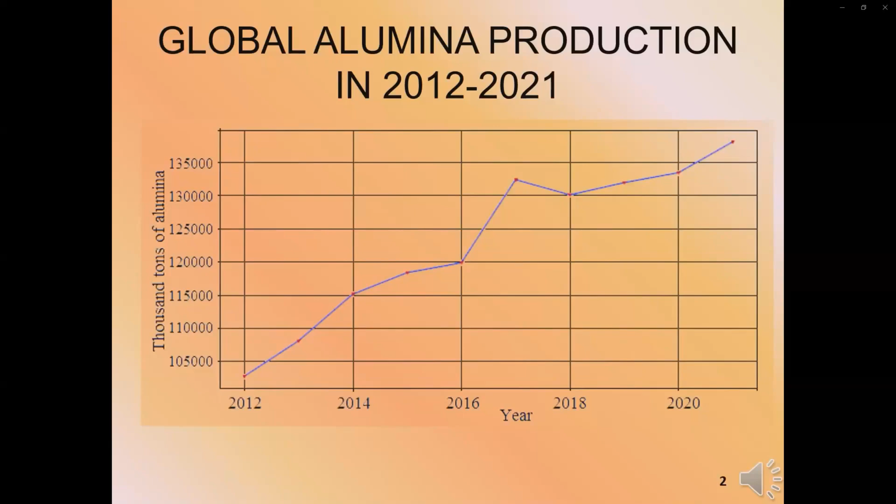Due to the lack of efficient sludge processing technology, red mud is stored in sludge storage facilities. They occupy a large area, pollute the environment, and pose a threat of environmental disaster in the event of a breakthrough in the wall of the slurry storage facility.

An example of such a case is the environmental disaster in Hungary in 2010. At a large alumina production plant, a dam containing a reservoir of toxic waste collapsed. Approximately 1.1 million cubic meters of toxic substance, red mud, leaked. The disaster affected an area of 40 square kilometers in 3 regions. 10 people became victims of the accident.

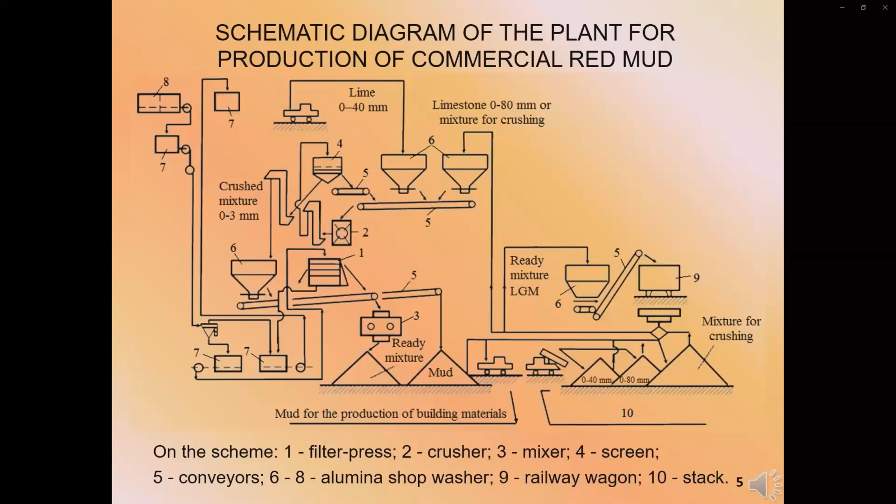Scheme for co-processing red mud and oily mill scale. An example of a hydrometallurgical process for processing red mud is the technology of joint leaching of red mud and oily mill scale, the scheme of which is presented on slide 8.

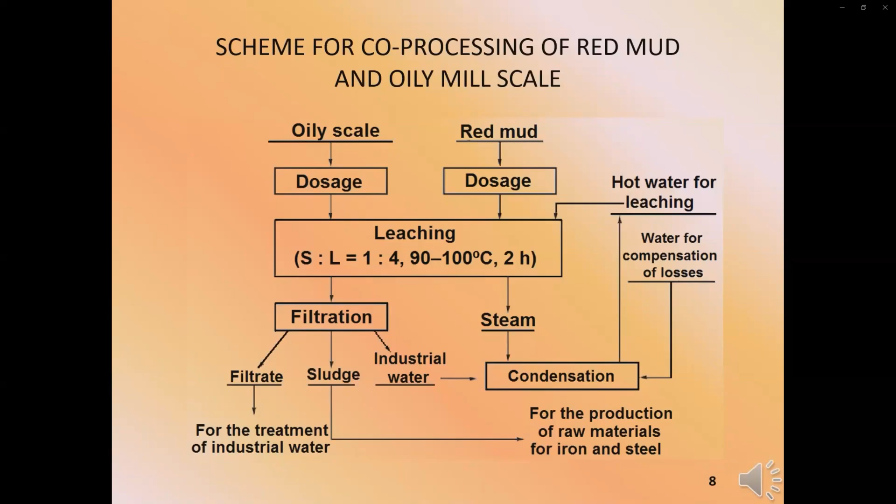Key findings: Due to the lack of effective technology for processing red mud, 95% of this product is stored in sludge storage facilities, which occupy large areas and harm the environment.

At the same time, sludge is a valuable technogenic metallurgical raw material. The processing of sludge pulp is complicated by high content of moisture and alkali.

Technology using filter presses is effective for sludge dewatering, and lime is used to separate alkali. It is advisable to combine thermal sludge cleaning with chemical processes for extracting valuable components.

The most promising for industrial implementation is complex waste-free processing of red mud, which involves, at the first stage, the pyrometallurgical extraction of thermodynamically extractable metals, and at the second stage, the hydrometallurgical extraction of the remaining metals from the slag, with the subsequent direction of the remaining solid materials to the construction industry.

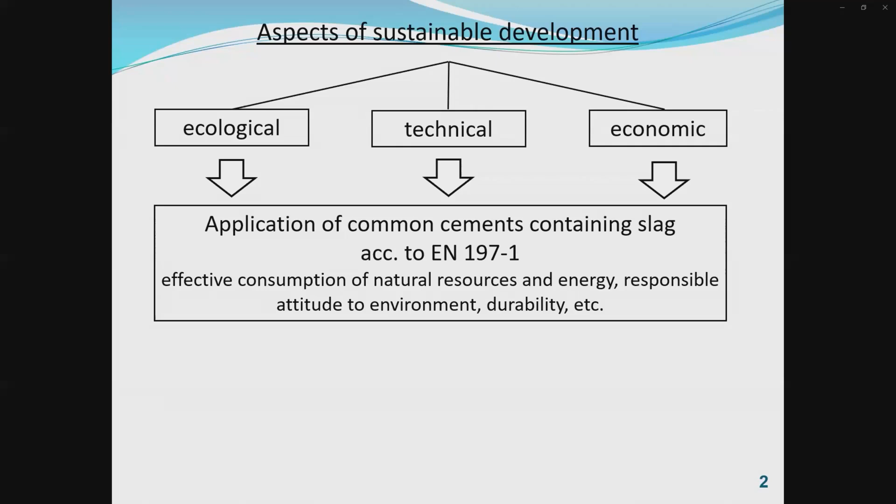The actuality of common cements containing slag implementation is due to their conformity with ecological, economic, and technical aspects of sustainable development concerning efficient consumption of raw materials and energy resources, responsible attitude to the ecology of the environment, durability, etc. The main problem of using common cements containing slag is slowed hydration processes and, as a result, loss of early compressive strength. The best solution for activating such cements is alkaline activation.

Sodium silicates, the anions of which are similar to hydrated initial products of destruction of the alumina-silica-oxygen framework and serve as their additional reserve, are found to be the most effective alkaline activators. The best solution is the use of sodium metasilicate pentahydrate due to its constant composition, market availability in a solid state, and easiness in use in the process of cement and concrete manufacture.

Increased slag content in cement systems and alkaline activation provide formation of more preferable hydration products, cause high strength gain and durability. The main obstacle in using the alkali-activated common cements containing slag made with sodium metasilicate is a quick setting.

The use of setting retarder, effective in alkali-activated cements, for example sodium lignosulfonate, can be a way to control their structure formation processes. So, the aim of the study was to discover an approach to control the structure formation in alkali-activated common cements containing slag through alkali activation with the help of sodium metasilicate.

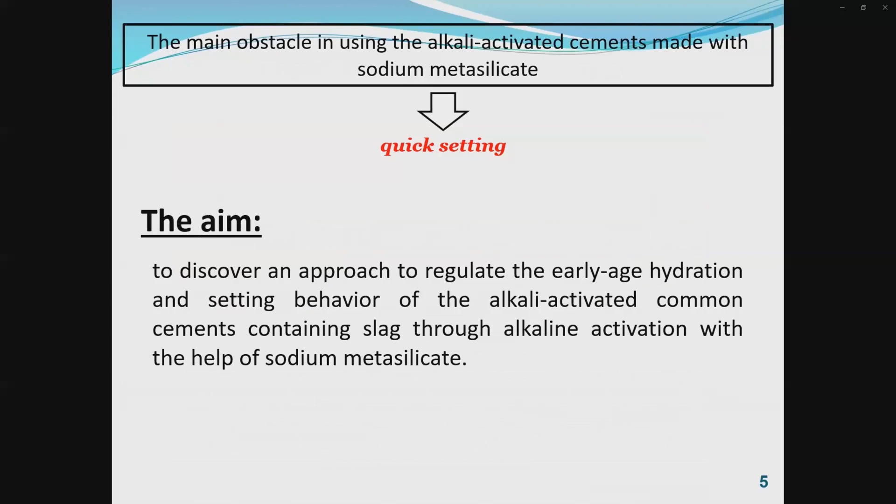Raw materials: granulated blast furnace slag, as well as Portland cement, CEM I 42.5R, were used as basic constituents of the common cements containing slag. To evaluate the basicity of the cement systems under study, a modulus of basicity as a ratio of masses of oxides was applied.

Decrease in basicity of cement system and use of surfactants can be a decision to provide required setting times of such cement.

Used as an alkaline component was sodium metasilicate in a solid aggregate state and a liquid aggregate state. Sodium metasilicate was added in two aggregate states, both in equal quantities, worth 12% calculated on dry matter. Sodium lignosulfonate was used as a setting retarder in the form of concentrated solution.

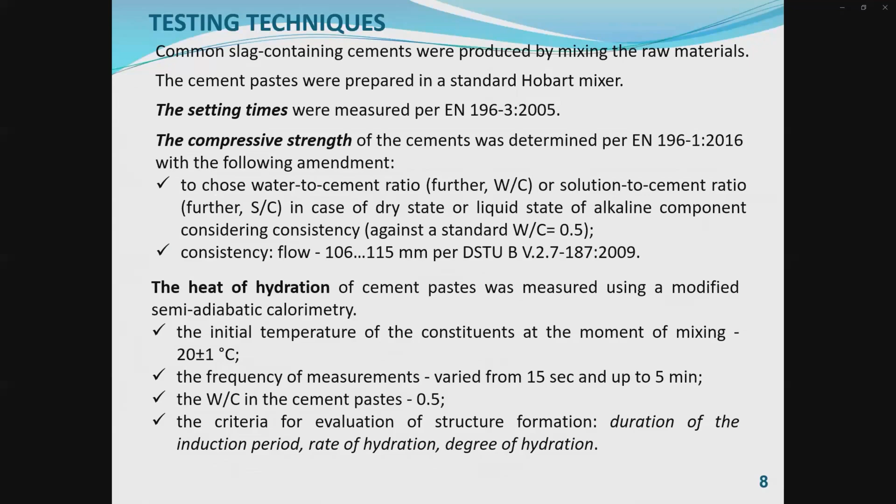The heat of hydration of cement paste was measured using a modified semi-adiabatic calorimetry.

The research work was divided into three parts. Task 1: research the influence of basicity of the cement system. Sodium metasilicate was used in solid form.

It was shown that with decrease in the alkali-activated cement system basicity from modulus basicity 2.5 down to 1.2, the structure formation processes retarded. An increase in the duration of the induction period, as well as a decrease in the degree of hydration, confirm this fact.

The alkali-activated cement system containing 5% slag is characterized by extremely quick setting times and low strength, correlated with data concerning the problem of its application.

An increase in slag content in the cement system from 5 up to 95% is accompanied by an increase in initial setting times from 8 up to 100 minutes, and final setting times from 11 up to 130 minutes. The obtained results correlate well with the data of the thermokinetic analysis.

With increasing slag content from 5 up to 95%, the compressive strength of the alkali-activated cement systems at an age of 2 days increased from 4 up to 34 MPa.

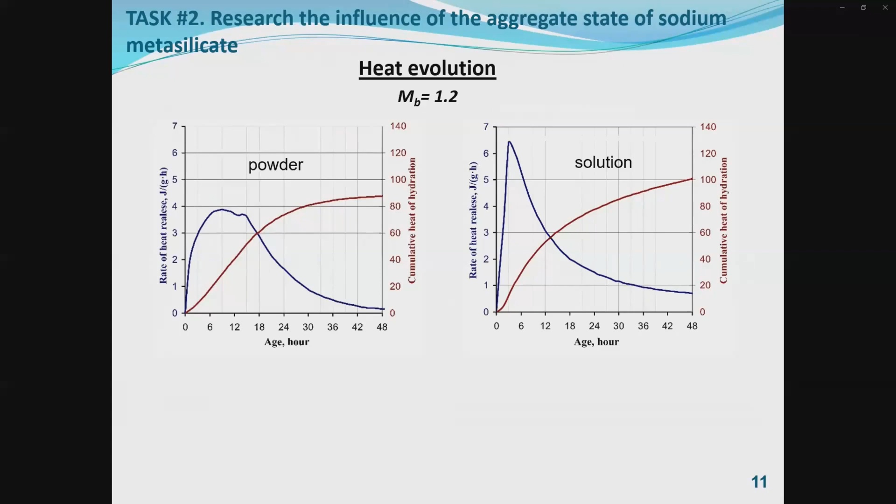Comparison of the setting times of the alkali-activated cement systems made with sodium metasilicate solution versus powder showed quicker initial setting times in the case of solution, within the range of 1-8 minutes. These initial setting times were too short and could not be accepted for the alkali-activated cement system.

The alkali-activated cement system containing 5% slag, in the case of solution, is characterized by still low strength compared with powder. The use of sodium metasilicate solution compared to sodium metasilicate powder resulted in high compressive strength of cement system containing

50-95% of slag at ages of 1, 7 and 28 days: 43-51 MPa, 88-92 MPa, and 108-115 MPa, respectively.

The obtained results testify to a necessity to decelerate the rate of structure formation in the alkali-activated cement systems, for the whole range of contents of slag constituents made with sodium metasilicate solution, to provide acceptable setting times.

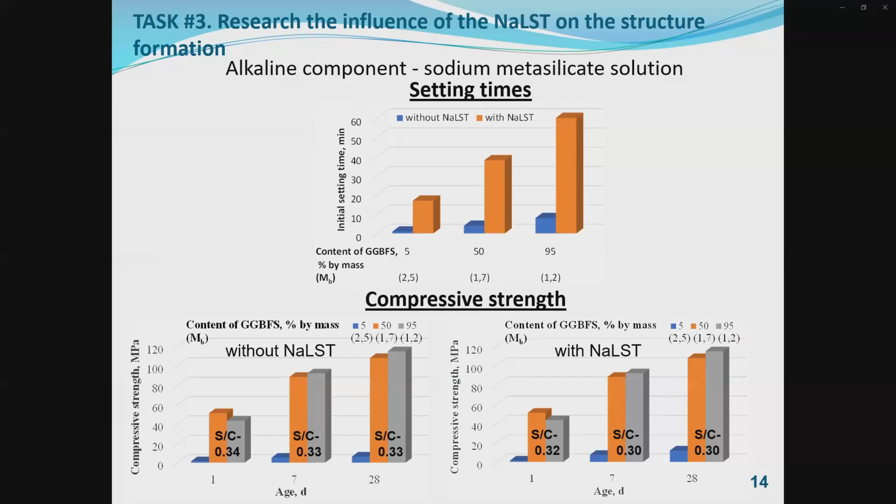Thus, it was revealed that alkaline activation with the help of sodium metasilicate in liquid form, in contrast to dry form, while necessarily decreasing the modulus of basicity from 2.5 down to 1.2-1.7, as well as application of sodium lignosulfonate as a setting retarder, enables control of early structure formation. This resulted in obtaining quick-hardening alkali-activated cement systems containing slag with regulated initial setting times of 38-60 minutes and high strength gain similar to that of high alumina cements.

Thank you for your attention.

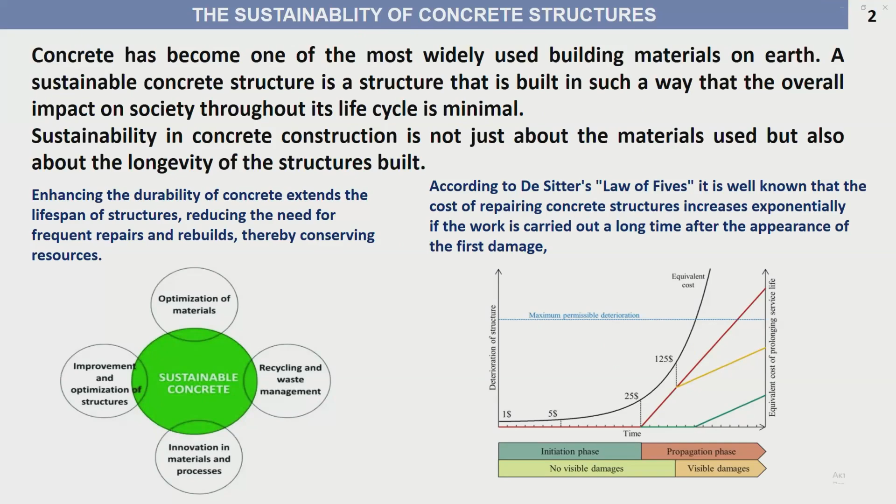Causes of building structure destruction include environmental influences and improper design of concrete and mortar. This leads to deformation and cracking, which reduce the durability of structures.

The interface between cement-based repair materials and the concrete substrate is a problem today. Therefore, the aim of this work is to design a composition of rapid hardening, non-shrinking cementitious mixture to enhance the sustainability of concrete structures, to study the process of their structure formation, and determine their physical and mechanical properties.

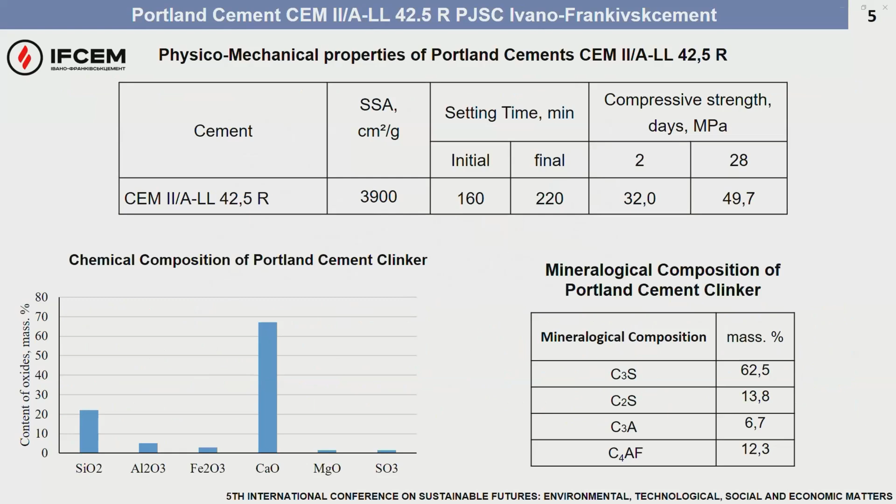As a binder of the repair mixture, Portland limestone cement of compressive strength class 42.5R from Ivano-Frankivsk cement plant was used.

The active mineral aluminum-containing additive, fly ash from Burshtyn TPP, was used for research. The specific surface area of the fly ash is 4,200 square centimeters per gram.

Sodium tetrahydroxyaluminate was used as an alkaline activator and accelerator of setting. The high aluminum oxide content enables the formation of calcium hydrosilicates and calcium hydroaluminates in the cement mixture.

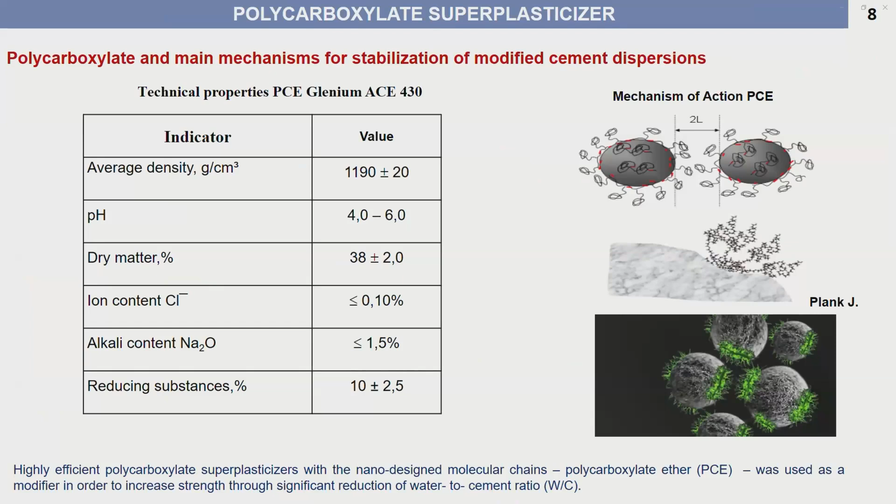Polycarboxylate ether superplasticizers were used to modify the mixture. Highly effective polycarboxylate superplasticizers with nano-designed molecular chains were used as a modifier in order to increase strength through significant reduction of the water-to-cement ratio.

Fine aggregate sands were used to design the cement mixture, with a fineness modulus of 1.25 for fine sand from the Davidov deposit, and fineness modulus of 2.76 for coarse manufactured sand.

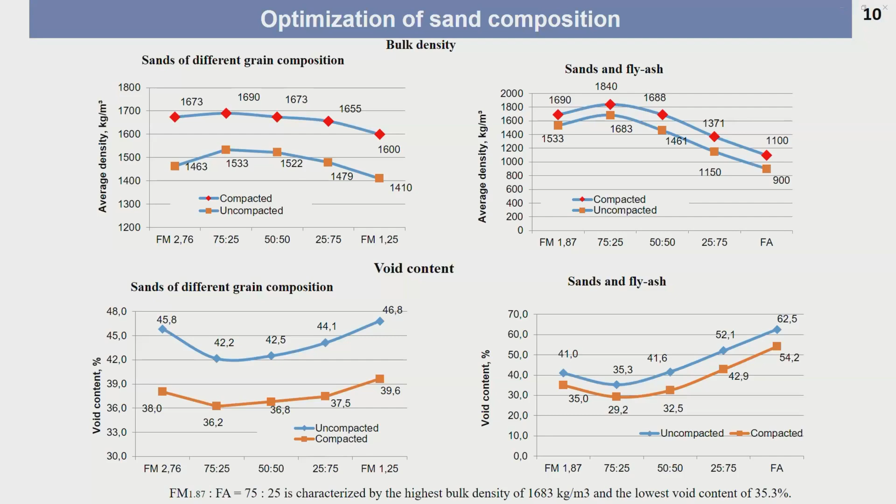To obtain a highly effective rapid hardening repair mixture with the most compact mesostructure, sands of different fractions were optimized. It was found that replacing quartz sand of fineness modulus 1.87 with 25% fly ash increased bulk density to 1,683 kilograms per cubic meter and reduced porosity to 35.3%.

The compositions of the repair mixture were designed using the method of experimental design based on criteria of setting time and strength. Fly ash from 0 to 20% and complex modifier sodium tetrahydroxyaluminate and PCE from 0 to 5 mass percent were used as variable factors.

The introduction of 10% fly ash and 5% alkaline modifier allows acceleration of setting time to 70 minutes initial and 140 minutes final.

The optimal composition with additives of 10% fly ash and 2.5% alkaline modifier ensures rapid hardening with compressive strength of 9.8 MPa and flexural strength of 3.4 MPa after 14 hours of hardening.

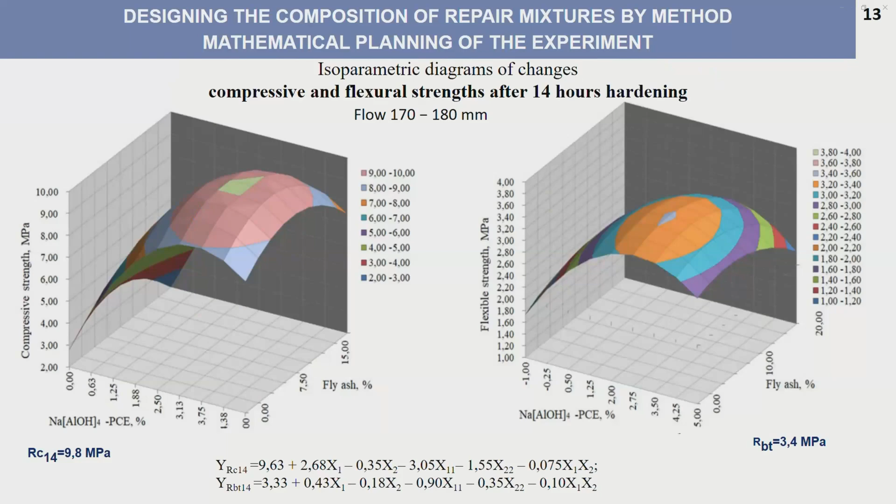The standard strength of the optimal composition is 70.9 MPa, while reduced temperature compressive strength reached 54 MPa.

It was established that the high technical effect of the repair mixture is achieved after 14 hours, reaching 64%. The optimal composition of the non-shrinkage repair mixture can be classified as a rapid hardening mixture.

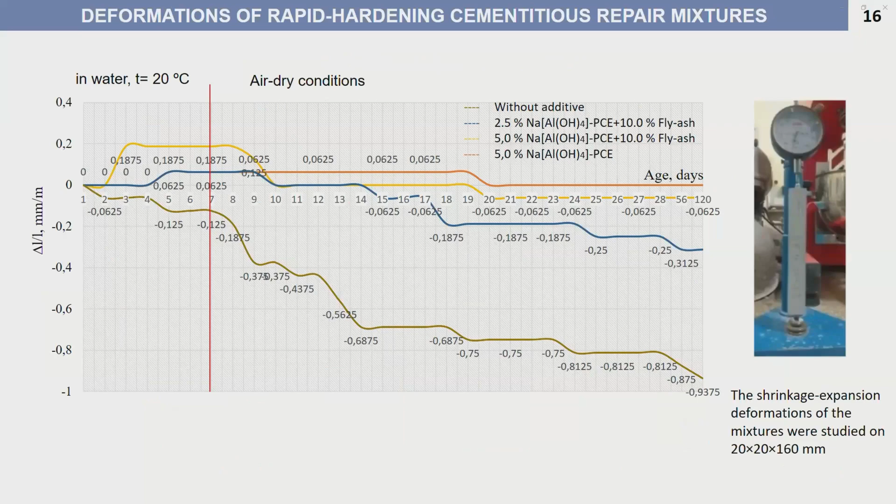The developed rapidly hardening cement mixtures are characterized by shrinkage deformation after 28 days of about 0.06 to 0.25 millimeters per meter. The adhesion strength to the concrete base after 28 days of hardening is 3.2 MPa.

X-ray phase analysis and microstructure of modified cement paste were investigated. The addition of 2.5% of combined alkaline additive and fly ash reduced the portlandite content by 2.7 times, which indicates an intense pozzolanic reaction in the modified cement paste.

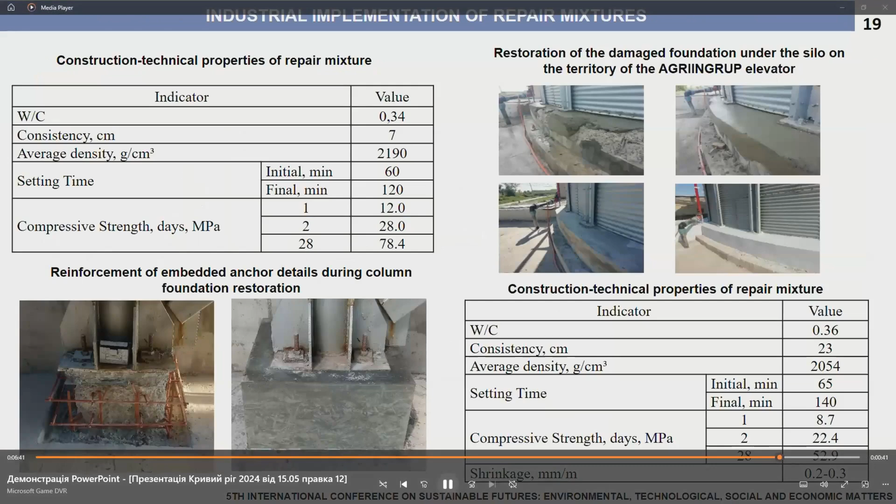The developed rapid hardening, non-shrinking repair mixture was used for repairing elevator foundation and reinforcement during column foundation restoration. Complex implementation of the effect of physical optimization and alkaline activation ensures the production of effective rapid hardening, non-shrinking cementation mixture for repair of concrete structures in accordance with the requirements of sustainability.

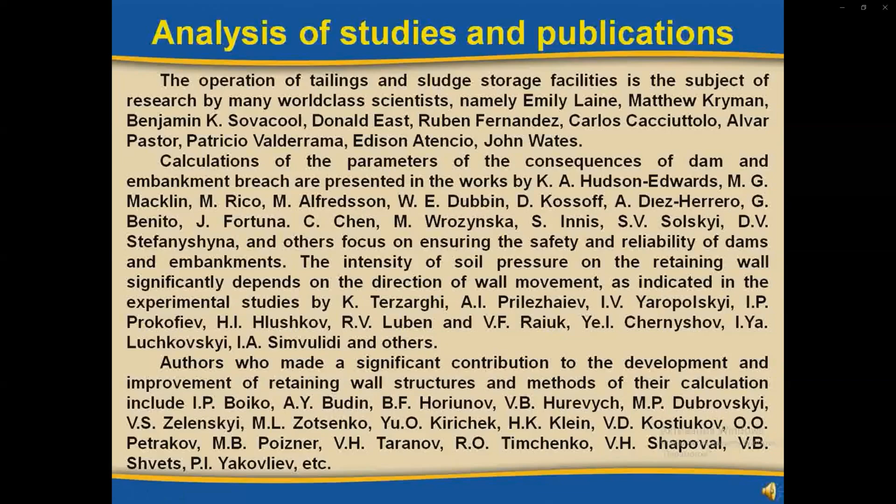The aim of the research is to ensure the stability of tailings dams by using the proposed prefabricated retaining walls with increased shear resistance during the multilayer backfill buildup and operation of the structure.

To achieve this, the following tasks should be solved: to conduct an analytical review of the schemes and designs of tailings dams.

To conduct a comparative analysis using the recommended methods to determine the safety factor for the calculated sliding curves, to develop a new design of the retaining wall to ensure the stability of the enclosing dams, and to formulate new principles for determining the horizontal pressure on the retaining wall, considering the multilayer backfill and the load on the surface.

In recent years, significant experience has been gained in the operation of storage facilities and the construction of dams and embankments made of waste and overburden. Any type of storage capacity, except for pit and basin ones, requires the construction of enclosing dams or embankments that are washed from waste materials or filled with overburden or local soils.

Depending on the technical conditions, enclosing dams or embankments can be built to their full height at once or in stages. Myroliubivka Tailings Pond is located on Velyka Krokva Gully, its slopes and adjacent areas. Velyka Krokva Gully flows into Hrushevata Gully.

The area around tailings ponds is built up with technological facilities and communications. Temporary man-made, rock-filled hydraulic formations, such as waste dumps, walls of embankments and dams, roads, sludge and tailings ponds, etc., play a significant role in the geological structure of the area. These formations are often tens of meters high.

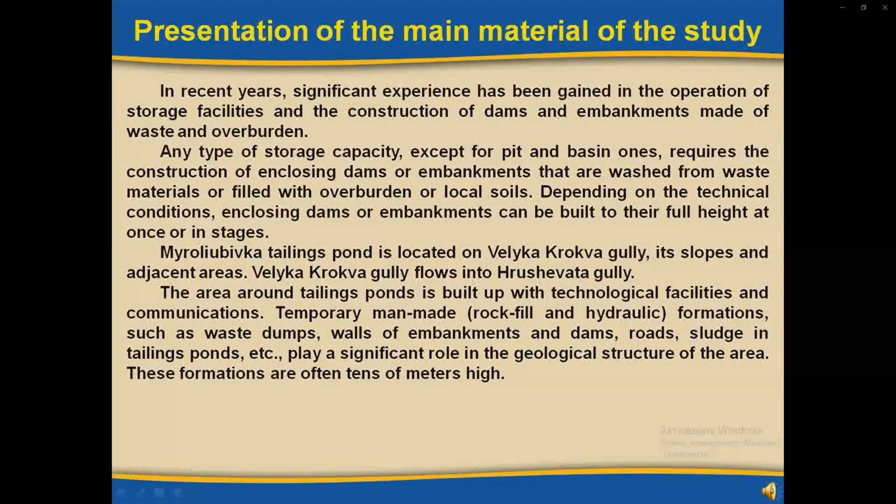To control the quality of the washed-in tailings, the Geotechnical Control Service, GCS, took 185 samples in 23 boreholes, figure 1, on the beaches at the dike at the 140.0 m level.

Based on the results of the measurements, graphs of subsidence are built, figures 2 through 5.

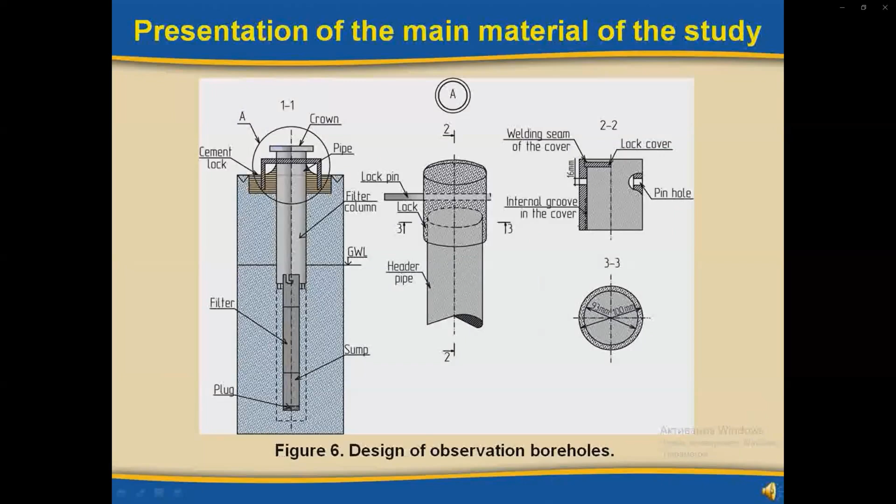To monitor the depression curve, water levels are measured quarterly in piezometers, figure 6, installed on the dams at 115.0 m, 120.0 m, 125.0 m, 130.0 m and 135.0 m crest levels.

Strength and stability of modern hydraulic facilities are assessed by the limit state method, according to which all the initial design values, which are random in nature, are represented by some deterministic values, and the impact of this variability on structure reliability is taken into account by relevant coefficients regulated by the standards.

In determining the dam stability in the vicinity of spillway structure 3, the following design case is considered. As for the main load combination, the dam has a 125.0 m crest, a normal retaining level of 123.5 m in the upstream, and filtration in the dam body. The dam stability is calculated by two programs, the Computer-Aided Design System for Ground Hydraulic Structures and the KZU-86K program.

Developed by specialists of the VIOGEM Institute, the All-Russian Research Institute for Mineral Deposits Drainage, Protection of Engineering Structures from Flooding, Special Mining Works, Geomechanics, Geophysics, Hydrotechnics, Geology and Mine Surveying.

The Computer-Aided Design System for Soil Hydraulic Structures, CAD-SHS, is designed to solve a number of problems in designing dams, dikes, upland ditches, sludge ponds, tailings dams and other structures. The software allows performing stability calculations using the following methods.

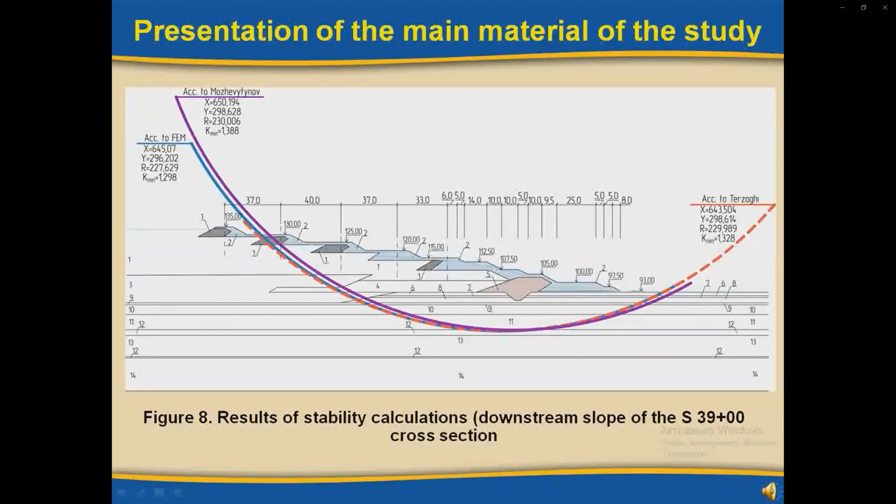The results of stability calculations are expressed as slip curves on the cross-sections of station S39+00 downstream slope, figure 8. The results of calculations of the stability of the downstream slope of the dam, with the selection of the minimum safety factors determined for the local curve, are shown in the design sections and summarized in Table 2.

Analysis of the actual condition of hydraulic structures, taking into account the calculations performed, allows drawing the following conclusions about Myroliubivka tailings storage facility. The reliability of the downstream slope of the tailings dam at Myroliubivka tailings storage facility is assessed in accordance with regulatory requirements.

Most calculated cross-sections, according to all the methods used to calculate the downstream slope, have a safety factor, both for general and local stability, that is higher than the minimum required by the standard. For certain cross-sections, minimum safety factors determined are less than the required standard values. For these sections, additional measures to ensure standard stability are required.

According to the standard, Kryvyi Rih is classified as an area with a seismic intensity of 6 points. Soil conditions at Myroliubivka tailings pond are classified as Category 3. At the same time, the overall seismicity of the area is 6 points and it does not fall within the seismicity standard.

On this basis, no seismic stability checks are performed at this stage of work. Recommended measures include constant monitoring of the dam condition of all hydraulic structures of the Myroliubivka tailings facility, compliance with design requirements for tailings allocation technology, the degree of wear of pipelines especially those passing through dams and in the vicinity of hydraulic structures, and compliance with design water levels in the tailings facility.

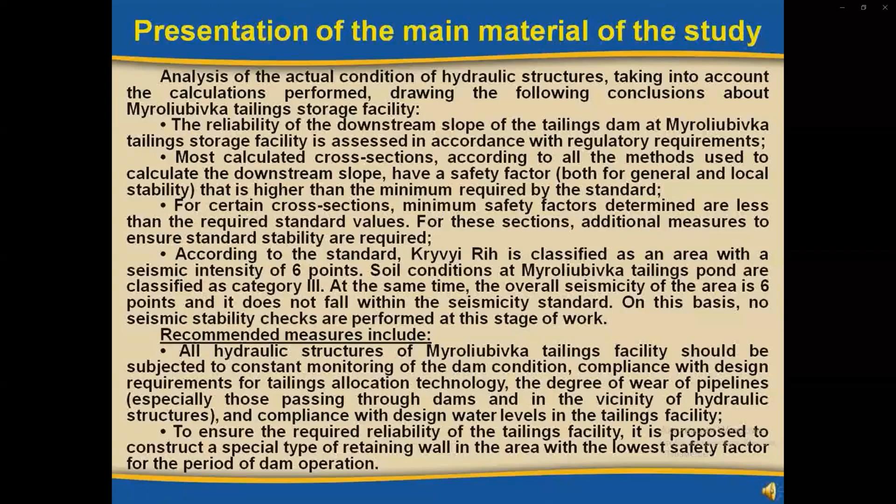To prevent premature filling of the cavities, two flexible separating sheets of elastic and pliable material made of a biodegradable polymer are placed on the back surface of the vertical element.

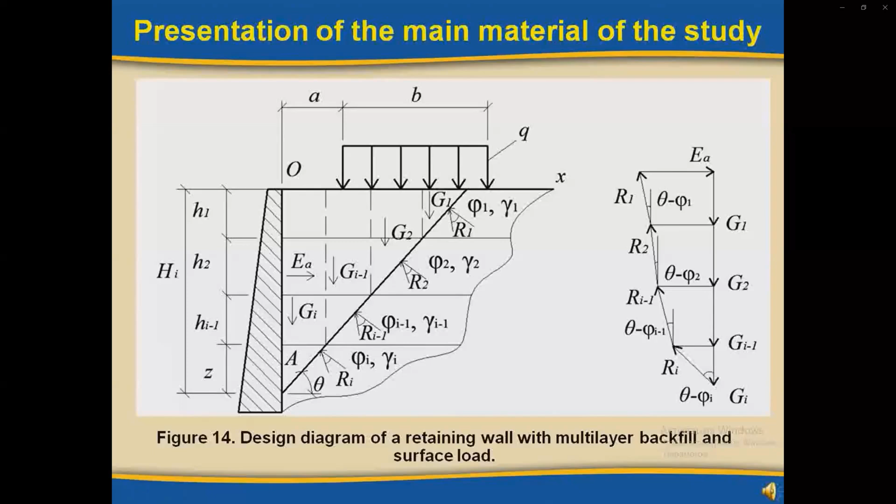The Myroliubivka tailings pond is an engineering structure of the first category of responsibility and currently requires new approaches, as well as changes in technology to ensure its stability during long service life. Available calculation methods based on the theory of linearly deformed media do not fully meet the operating conditions.

Consideration of the influence of a multilayer nonlinearly deformed massif under external loading allows formulating new principles for determining horizontal pressure on the retaining wall. Namely, the mass between the wall and the shear plane is divided into separate prisms resting within each layer on the collapse plane. The prisms are divided by vertical planes extending from the intersection of the collapse area with the boundaries of the soil layers to the backfill surface, in areas of loaded surface, or to the footwall of the local load.

Part of the distributed load located on any prism is summed with the weight of this prism, i.e. included in the value Gi. Interaction of prisms along vertical planes is not taken into account. Each depth has its own collapse area, the position of which does not depend on the total wall depth max.

Application of a special type of retaining wall allows obtaining an economic effect due to both the design solution and the extension of service life. The effectiveness of the existing system for protecting the aquatic environment, primarily groundwater, from pollution by the Myroliubivka tailings dump in the area under consideration is estimated at 87%. Thank you for your attention.

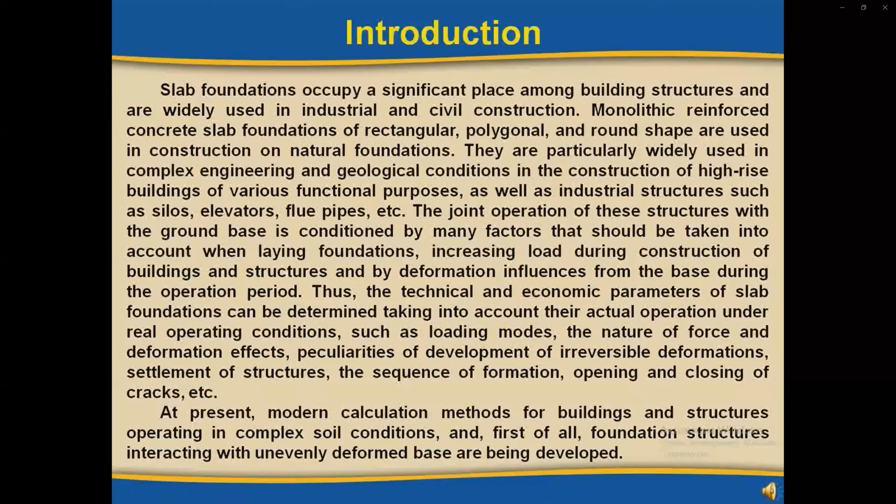Theoretical development and experimental substantiation of nonlinear models of the soil environment, which allow describing the process of its deformation at all stages of loading, are highlighted by I.P. Boyko, E.F. Vinokurov, U.L. Vinikov, A.L. Golden, A.E. Delnik, B.I. Diduk, U.K. Zaretsky, N.L. Zutsenko, Z.G. Termartorosian, D.M. Shapiro, V.G. Shapoval, V.B. Schvetz, V.N. A.U. Bishop, D. Drucker, Schofield, and others.

These researchers have made a significant contribution to the development of the theory of calculation and the practice of foundation construction for special construction conditions: U.M. Abelev, A.L. Gottman, Z. Gottman, B.I. Dalmatov, U.K. Zaretsky, S.N. Klepikov, A.A. Petrikov, E.A. Sorokin, R.O. Tinchenko, A.B. Fediv, A.V. Shkola, J. Gedz, E. Kviatek, G. Kratch, U. Lutkins.

The research aims to substantiate and develop a method of calculating round foundation slabs interacting with the non-uniformly deformed base, taking into account inelastic deformations of reinforced concrete and soil under complex loading. In order to achieve this goal, it is necessary to perform an analysis of available experimental data and theoretical generalizations to select the regularity of deformation of the reinforced concrete slab and the soil base under complex loading.

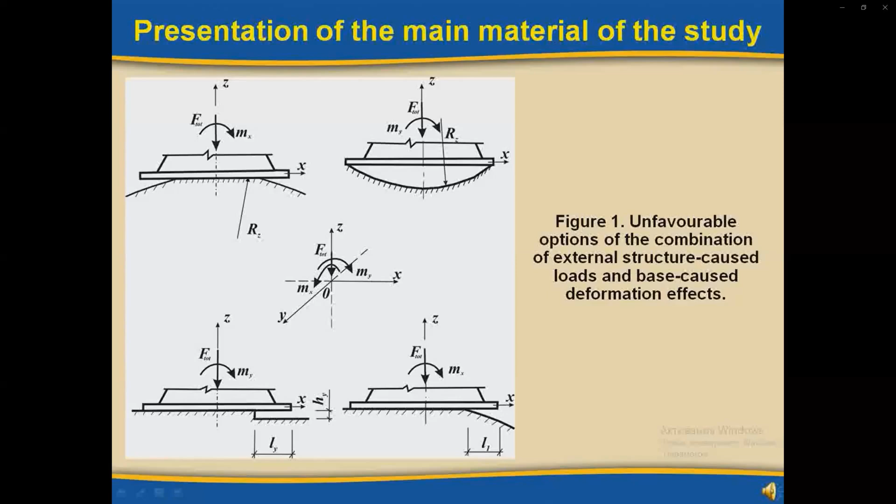Solving the problem of determining the load-bearing capacity of foundation slabs operating under non-uniform base deformations requires considering nonlinear and inelastic deformations of reinforced concrete and soil. In addition, it is necessary to take into account geometric nonlinearity of the contact problem.

The operation of round foundation slabs under non-uniform deformations of the base, taking into account deformation characteristics of reinforced concrete and soil, can be studied on mathematical models. For this purpose, consider a round foundation slab under the influence of arbitrary normal to the median plane of the

The slab has a finite stiffness, but large enough to ignore membrane forces acting on the foundation bed and having little effect on the overall slab operation, especially on its load-bearing capacity.

The load from these forces is perceived only by the lower part of the cross-section, so they cannot exhaust the load-bearing capacity of the slab.

The behavior of a reinforced concrete foundation slab at any operation stage is described by systems of resolving equations, combining equilibrium, geometric and physical equations.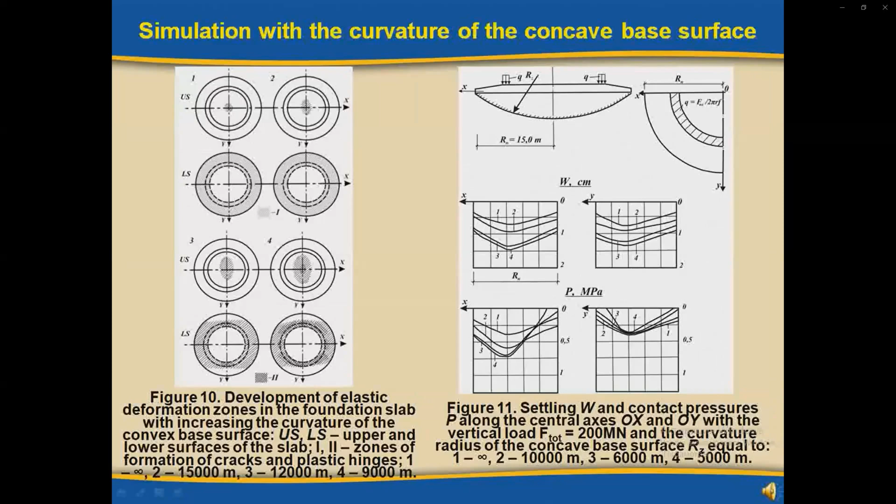The following values of the conventional curvature radii of the concave base surface Rz are simulated: 10,000 m, 6,000 m, 5,000 m at load F_1; and 15,000 m, 12,000 m, 10,000 m at load F_2.

Reduced characteristics of the deformed base are determined accordingly. In the first case, at F_1, the load-bearing capacity of the structure is exhausted at the value Rz,u1 equal to 5,000 m, and in the second case, for F_2, at Rz,u2 equal to 10,000 m. The simulation results are shown in Figures 14, 15, and 16.

Simulation with the base settling at the end of the foundation. It is necessary to investigate the behavior of the round foundation slab with different values of the settling section of the base at the end of the foundation.

The slab undergoes the following loads: the total vertical load F equals 200 MN, the external moment M1 equals 150 MN·m, and the height of the center of gravity of the structure relative to the foundation bed Hc equals 75 m. The simulation is carried out with the length of the settling section (ledge) y equal to Rn, and heights equal to 0.100 m, 0.200 m, and 0.25 m.

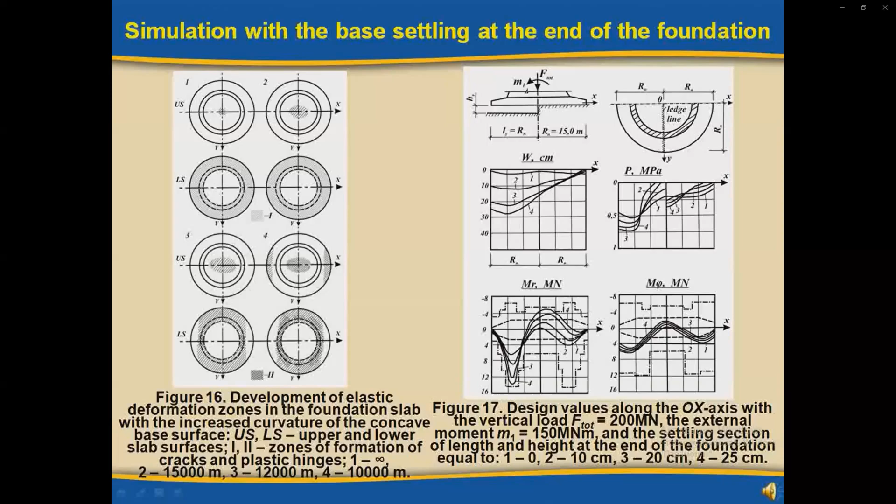The characteristics of the settling section are determined accordingly. The simulation results are shown in Figures 17, 18, and 19.

With the settling section y equal to Rn and height equal to 0.25 m, the resulting roll begins to increase sharply, theta 2 equals 0.0120, reaching the limit value set by the standards for the structure. A further increase in the roll leads to a loss of stability of the foundation slab position; therefore, the load-bearing capacity of the structure is exhausted. At the same time, the fracture lines are at the initial stage of development.

Analysis of simulation results. The simulation results show that the stress-deformed state of the round foundation slab, and the patterns of its load-bearing capacity and the zones of formation and development of plastic hinges under non-uniform deformation of the base surface, differ depending on the type of change in the shape of the base surface. The main zones of formation and development of fracture lines in the slab under various deformation conditions of the base are shown in Figure 20.

New patterns of determination of internal forces for possible conditions of the first and second category elements of the reinforced concrete slab under complex load are established. The characteristic feature of the second category elements in the passive deformation state is the determination of the moment corresponding to the curvature of the load release curve.

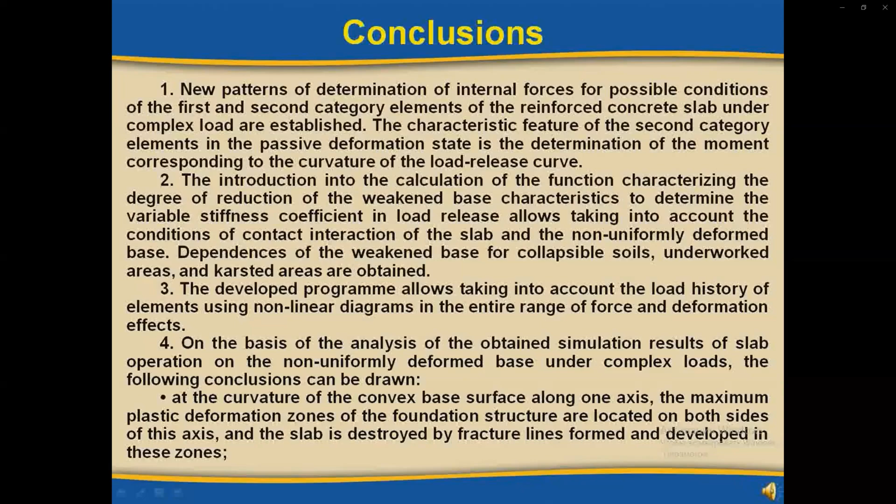On the basis of the analysis of the obtained simulation results of slab operation on the non-uniformly deformed base under complex loads, the following conclusions can be drawn. At the curvature of the convex base surface along one axis, the maximum plastic deformation zones of the foundation structure are located on both sides of this axis, and the slab is destroyed by fracture lines formed and developed in these zones.

At the curvature of the base surface, the zones of plastic deformations of the structures are located mainly in the places of reactive soil pressures concentration. The curvature of the convex base surface, and to a lesser extent the bearing capacity, adversely affect the operation of the foundation slab as compared with the curvature of the concave at the same values of the vertical load F.

Depending on the size of the settling section at the end of the foundation, the load-bearing capacity of the structure may be exhausted either due to destruction caused by the formation of plastic hinges, or due to loss of position stability caused by large inadmissible rolls. The value of the limit load on the slab decreases with the increase of deformation effects of the base on it.

Under non-uniform deformations of the base, the main areas of destruction of round foundation slabs are the footing support points, but in some cases, with curvature of the base surface or settling of the base at the end of the foundation, such a zone may occur in the central part of the slab.

Thank you for the attention.

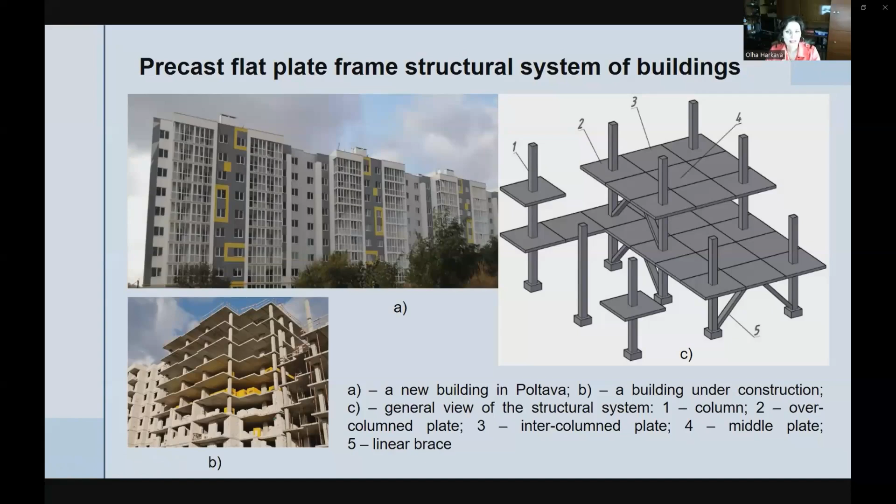Experimental data for such plates are scarce today, and so there is a need to experimentally investigate the over-columnate plates in order to confirm the developed yield line destructive scheme.

For this purpose, 3 full-scale samples of over-columnate floor plates were used for conducting experimental tests. The plate samples had nominal dimensions 3 by 3 meters with thickness 160 millimeters. The heavy concrete of grade C25/30 was used, and the samples of the slabs are reinforced with special cages.

These cages include the upper M1 and lower M2 plane meshes, positions 1 and 2, and an embedded supporting structure in the form of a steel clip with vertical cages welded to it. The reinforcing bars of diameter 14 and steel grade

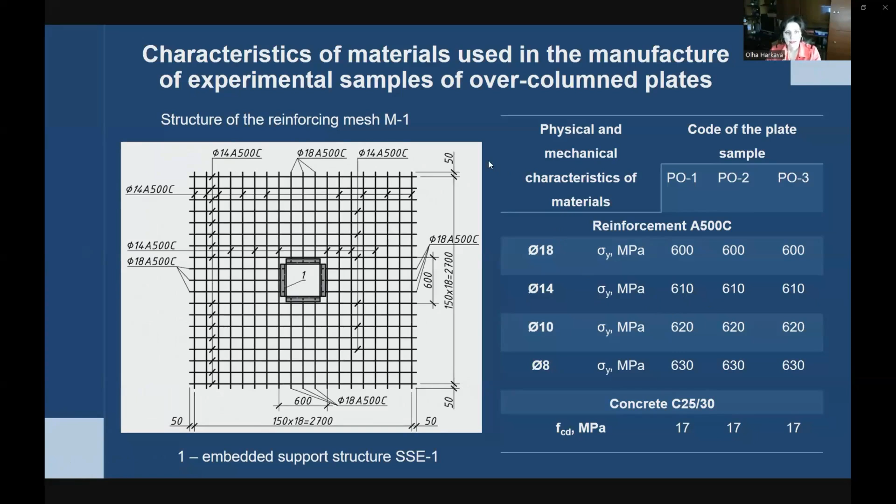A500C were used as principal reinforcement for the top mesh. The characteristics of concrete and reinforcing steel used for manufacturing the plate samples were provided by the manufacturer.

After the production of test samples, strain gauges with base of 20 mm and 50 mm respectively were pasted on the reinforcing bars and the concrete surface in the zones of possible destruction of the plates.

Control tests of full-scale samples of over-columnate plates were carried out on a specially designed stand according to the developed scheme. The testing scheme was adapted in such a way that it allowed implementing the design destructive scheme, which is realized in the composition of a flat plate floor system.

A stand with a hydraulic jack was used to load the experimental samples, and watch-type deflection gauges were also used for checking the deflections.

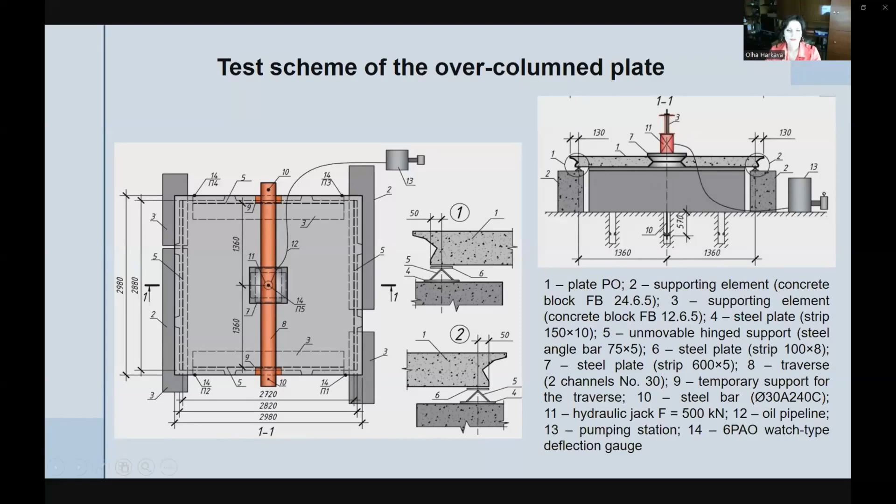The test of 3 identical over-columned plates were carried out to external load values of 320, 360, and 400 kilonewtons. These values of load made up about 55, 60, and 70% of the design destructive load calculated by the yield line method.

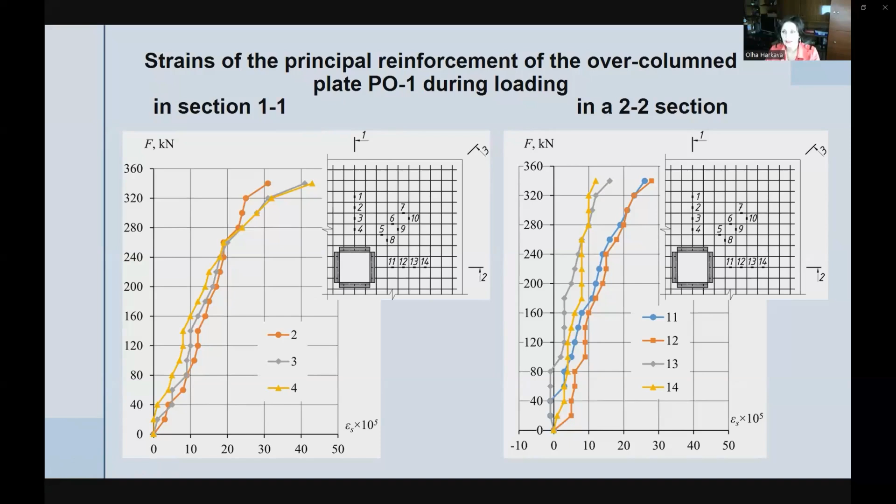At the same time, in section 3-3, we can observe a significant increase in strains when approaching the supporting opening. Therefore, it can be predicted that destruction of the plate will begin when the yield point is first reached in the reinforcing bars that pass around the plate opening. The maximum value of tensile strains in principal reinforcement in section 3-3 were 60-70% of yield strains, and the minimum values were about 30-40%.

The strains of concrete located in the compressed zone were also studied. The maximum values of concrete compressive strains were observed at the location transferring to sections 1-1, 2-2, and 3-3, and those values were about 20-30% of the ultimate values of compressive strains for concrete grade C25/30. Maximum values in the longitudinal direction were about 3-8%.

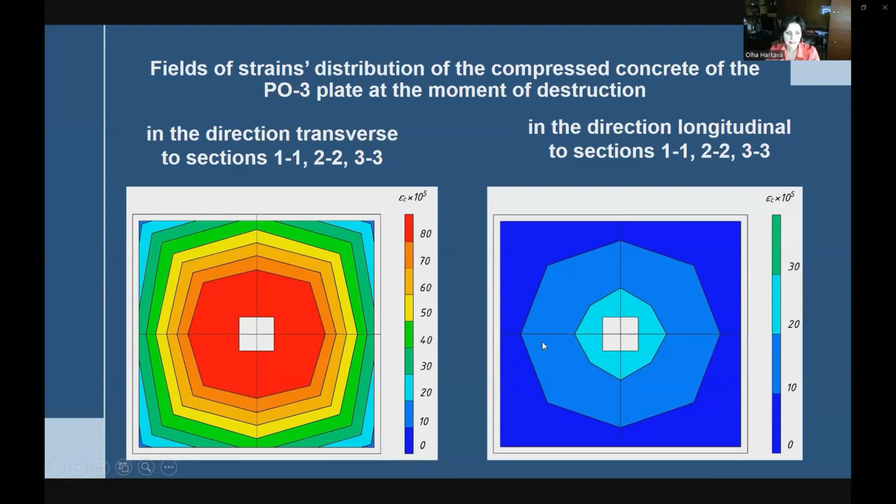Examining the fields of strains distribution, it can be concluded that with gradual approach to the supporting opening, the values of concrete strains in the direction transverse to the section increase significantly. At the same time, in the longitudinal direction, this tendency is much less pronounced.

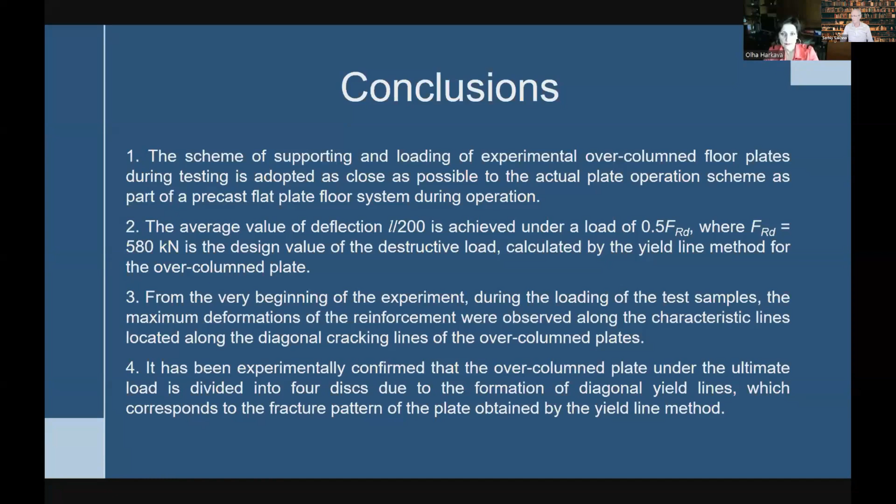At the same time, the plate will be divided into separate discs connected by these diagonal yield lines. As a result of conducting experimental tests of full-scale samples of the over-columned plate, the following conclusions are established. The main one is that this investigation has experimentally confirmed that the over-columned plate under ultimate load is divided into 4 discs due to formation of diagonal yield lines, and this corresponds to the fracture pattern of the plate obtained by the yield line method, the use of which is approved in this study. Thank you for your attention.

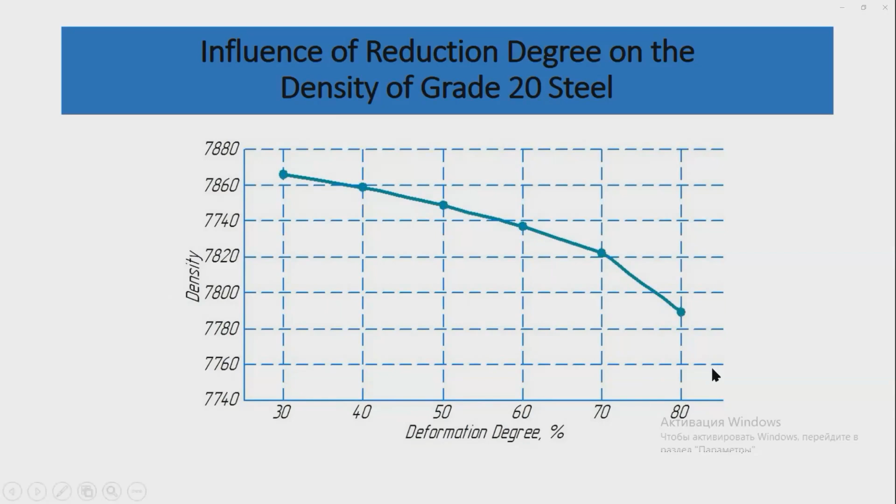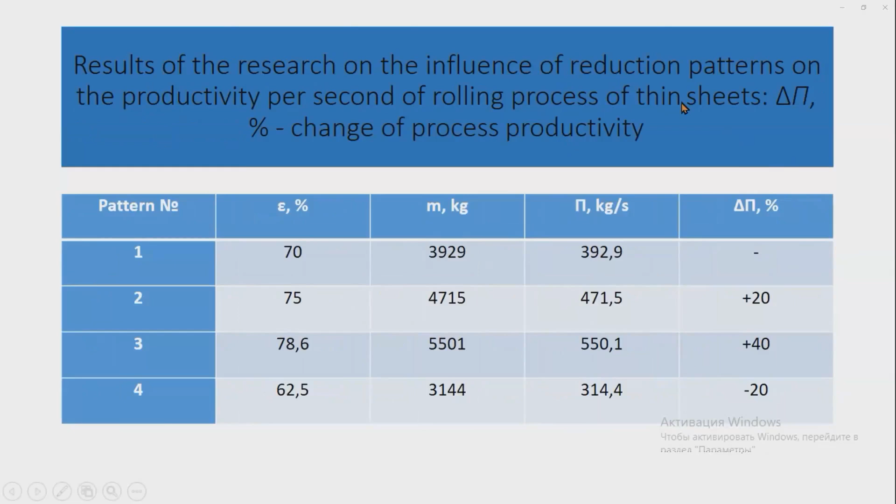This indicates that as the cold rolling process of thin sheet increases in deformation degree, it occurs under more severe conditions. The load on process tools and equipment increases, rolling rolls wear more intensively, and energy costs increase. All this leads to an increase in processing cost and is a negative phenomenon.

Also, with increasing compression degree, processing productivity increases, which is a positive phenomenon. As a result of detailed study of all the positive and negative phenomena, a compression degree of 70% was accepted as optimal.

With increasing compression degree, process productivity increases, but the processed material is significantly hardened and loses plastic properties. Reducing the amount of compression doesn't allow obtaining the necessary strength in the thin sheet and reduces process productivity.

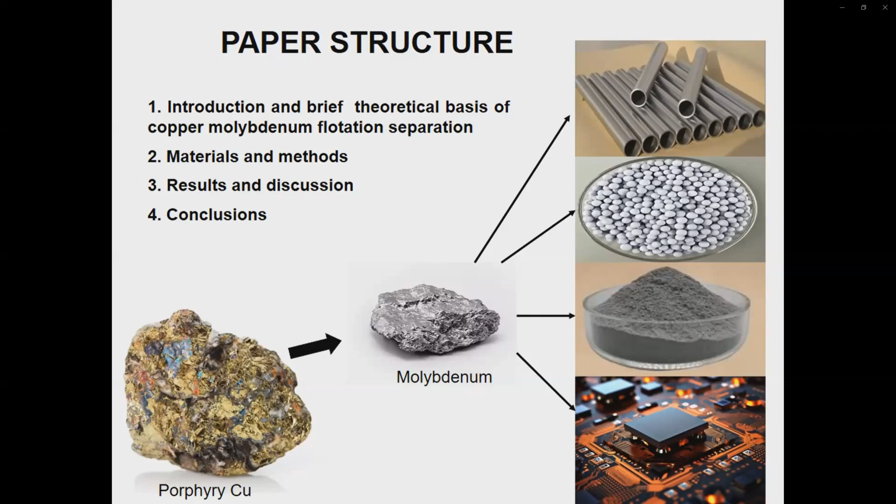Molybdenum concentrate is produced mainly as a byproduct of copper molybdenum sulfide ore processing. Porphyry copper deposits are among the most important resources. In the most widely used flotation flow sheets of this source, in the first stage, bulk copper sulfide concentrate containing molybdenite is obtained. In the second flotation stage, molybdenum and copper concentrates are separated. The reagents in bulk copper molybdenum concentrate producing stage usually are lime as modifier, xanthate as collector for copper ores, and fuel oil or kerosene for molybdenite, and pine oil as frother.

However, the lime used as pH modifier might depress a portion of the molybdenum mineral, causing losses. In the copper molybdenum separation stage, when chalcopyrite is the main copper mineral, either sodium hydrogen sulfide or sodium sulfide is used as depressant.

When proper pH and oxidation reduction potential values are achieved, copper minerals are depressed and molybdenite is recovered as flotation concentrate. However, high amounts of reagents are needed to depress copper minerals and recover molybdenite, especially in the presence of oxygen in air and dissolved oxygen in water.

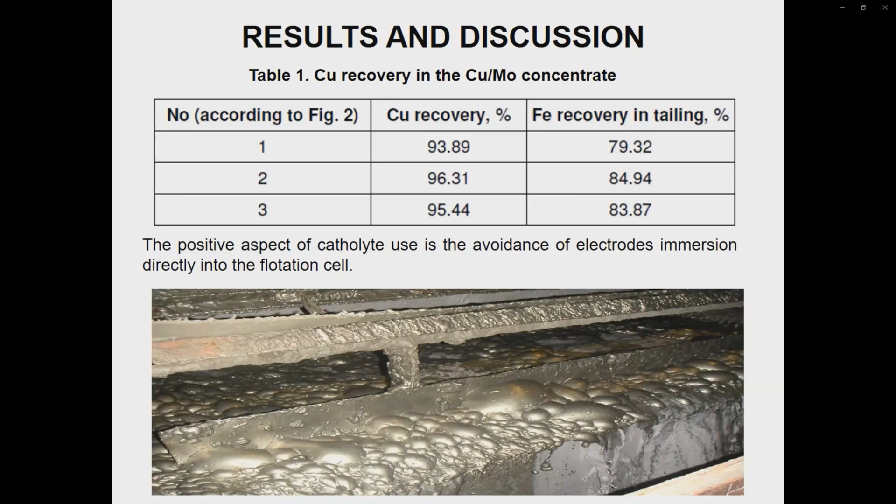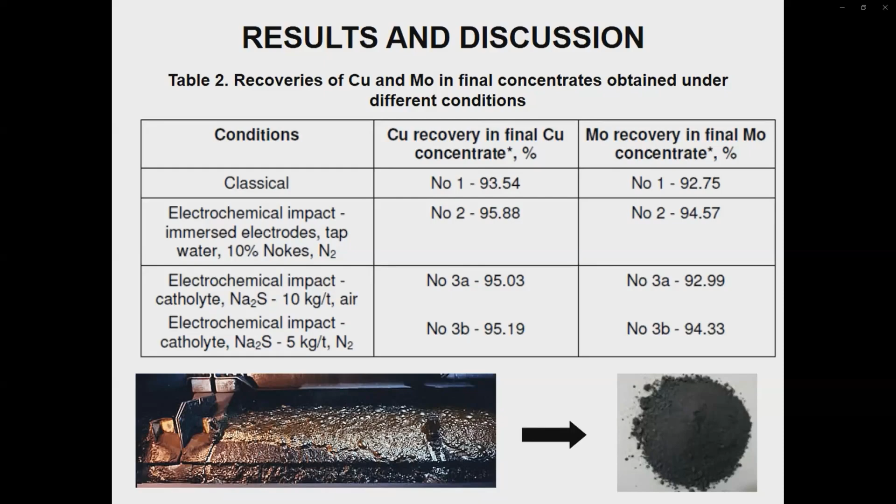In conclusion, effective copper pyrite and copper molybdenum flotation selection can be achieved at significantly reduced amounts of reagents used, with the aid of an electrochemical impact achieved both by electrodes immersed in the flotation pulp or by using catholyte for pulp preparation. The optimum pH potential range for molybdenum recovery and the lowest copper recovery in molybdenum concentrate is determined as -160 to -270 mV and pH 10-11 under air conditions.

Molybdenum flotation separation from copper can be effective by controlling the pH ranges of the flotation pulp, either by reagents addition or by electrochemical impact. Minimization of reagents used, or their replacement by an electrochemical impact, exhibits several advantages: easier process control by applied electrical energy, a possibility for faster and facilitated response to changeable minerals feeding the flotation process, including impoverished and complex ores, and improved environmental impact.

Thank you for your attention.

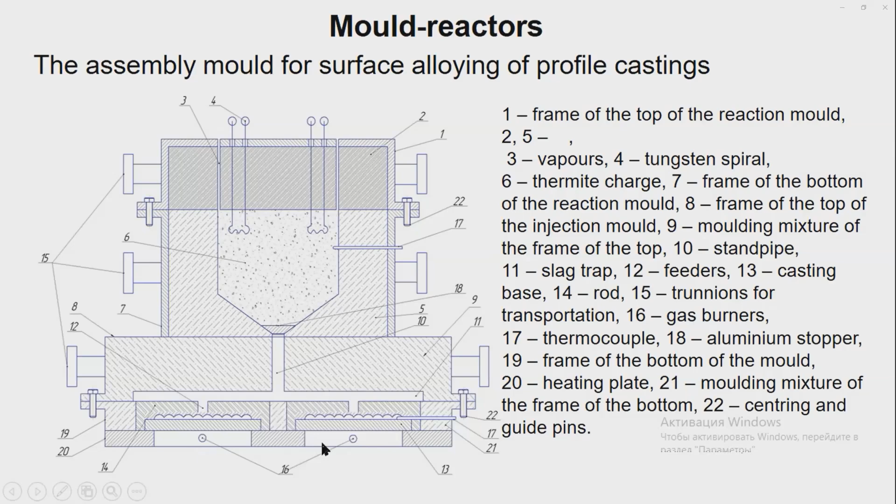A mold reactor with an open metal base is recommended in the lower part: mold mixture, thermite charge, metal base, hole for ignition of thermite charge, and gas discharge.

The mass of thermite mixture is determined by Formula 1. The volume of this thermite mixture is calculated by Formula 2.

The resultant compacted mixture is filled in layers into the reaction mold. After that, the reaction form is placed into a heating furnace to heat the mixture.

Determination of the average volume velocity of the combustion front was conducted by Formula 3.

The optimal heating temperature of the casting base is determined by the temperature and the time of melt interaction with it, the maximum thickness of functional layers, and the wall thickness of the casting.

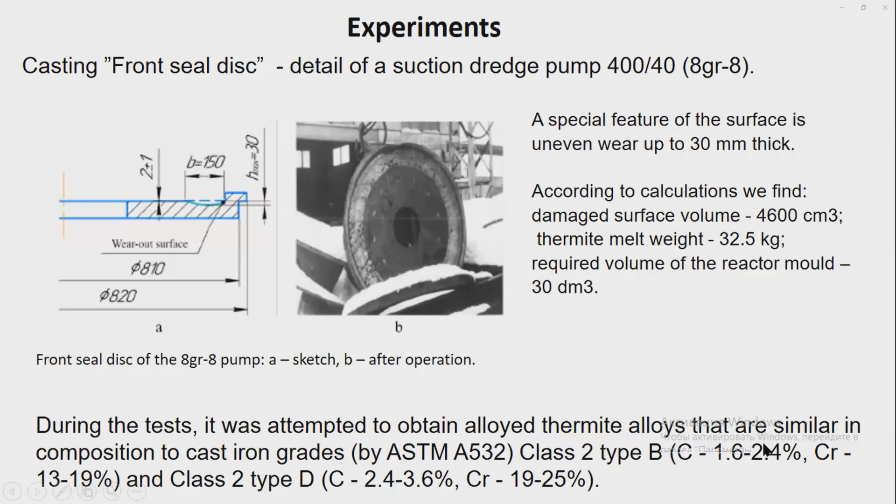Based on the result of calculation, the indicators of the melt formation process for various charge compositions were determined, considering the heating temperature.

The chemical composition of charge 2 is close to cast iron class 2 type D, to obtain a wear-resistant layer.

The highest melt yield, 55%, can be obtained by heating the charge up to 873 Kelvin.

A sample obtained from charge 2 was selected due to high wear resistance and microhardness, to examine the quality of the connection of the functional layer with the casting base.

In cross sections there are no distinctions in the functional layer, the fusion of casting layers, is characterized by a defect-free connection zone.

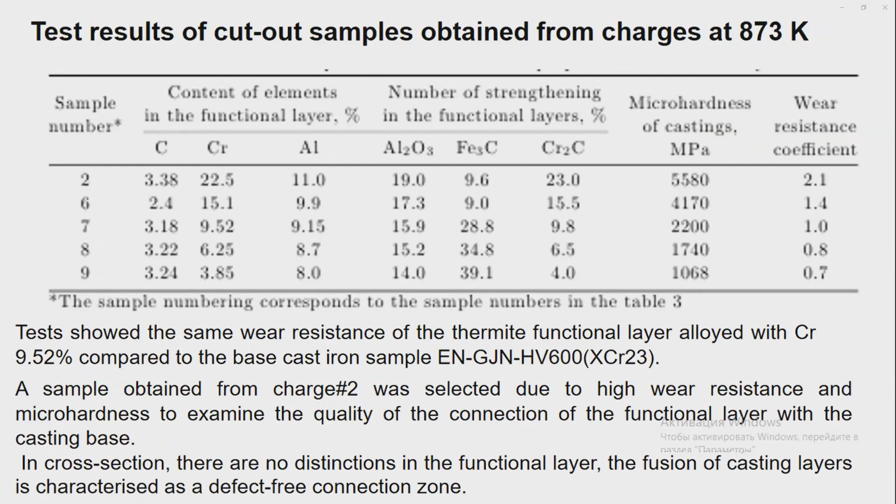The conducted studies allow concluding that fine-grained chromium carbides are present in the microstructure.

Functional layer: inclusion of chromium carbides with imprints from the diamond pyramid. The microhardness of which is...

18,540 megapascal. The carbide component forms around the corundum, prevailing against the background of the fragmented relief.

So the proposed technology allows the following: obtaining a high quality surface connection zone made of the non-alloyed melt with the alloyed functional layer made of thermite cast iron, close in composition to class 2 type D.

Increasing the inter-repair period of casting due to almost 2 times greater resistance, reducing energy cost in the production of melt by the aluminium thermit method, and reducing the cost of production.

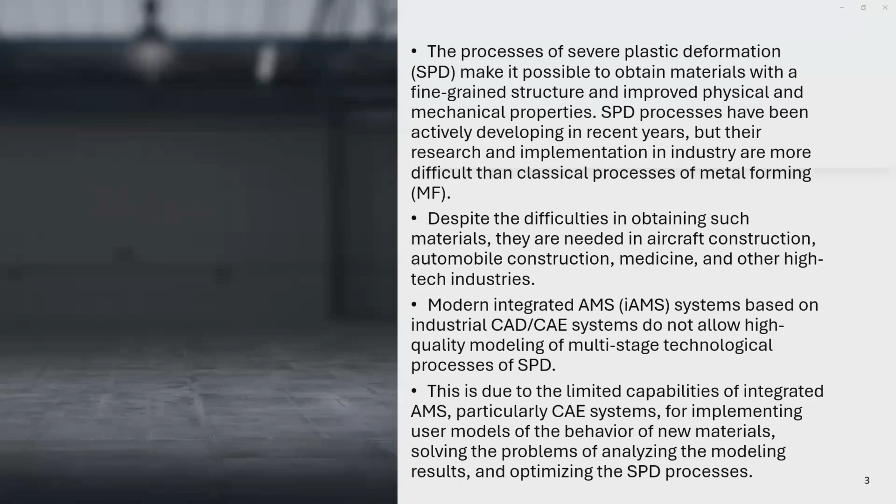Currently, various CAD systems have been developed for the design of individual processes or groups of typical processes of metal forming, which allows reducing the time for preparing the calculation in the CAE system. For less common SPD processes, such CAD doesn't exist. When simulating SPD processes, additional problems arise related to the features of the process itself - the need to simulate various variants of billet loading schemes, large plastic deformations, changes in deformation route, thermal mode, etc.

Nowadays, the problems of computational complexity in modeling plastic deformation processes, which are labor-intensive and require significant expenditure of machine time, remain unsolved. The purpose of this research is to improve the quality of integration of CAD/CAE systems and develop the functionality of an integrated automated modeling system based on the creation of an object-oriented core for combining external independent models that provide flexible and adequate modeling of multi-stage SPD processes using parametric models.

To solve several tasks in the design of SPD processes and the development of AMS functionality, it is necessary to develop a core that should provide the possibility of modeling multi-stage combined SPD processes, support the integration of external models - modern CAD systems like SolidWorks, and CAE systems like Abaqus and Qform, for example, for modeling the stress-strain state of a billet during deformation, and to provide research into the technological possibilities of new SPD processes based on the parameterization of models of billets and die sets. Based on the analysis of the capabilities of CAD/CAE systems, we have highlighted the functions that should support the core of the integrated AMS and the necessary mechanisms for this.

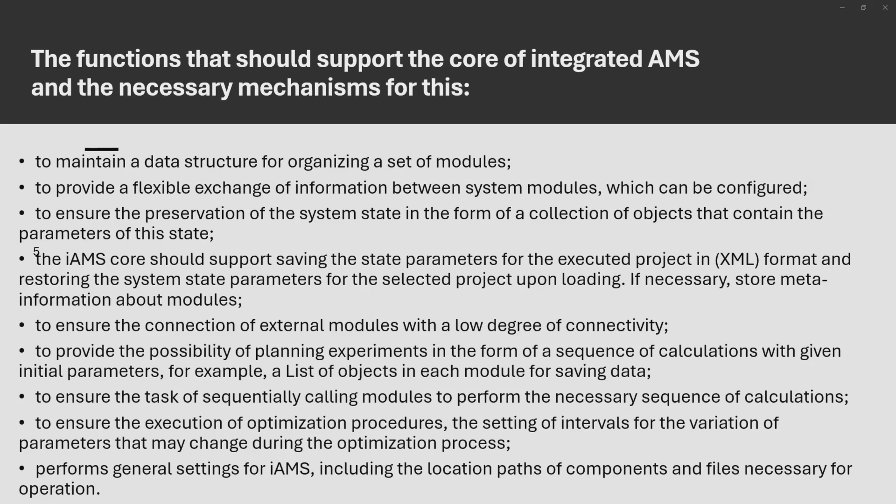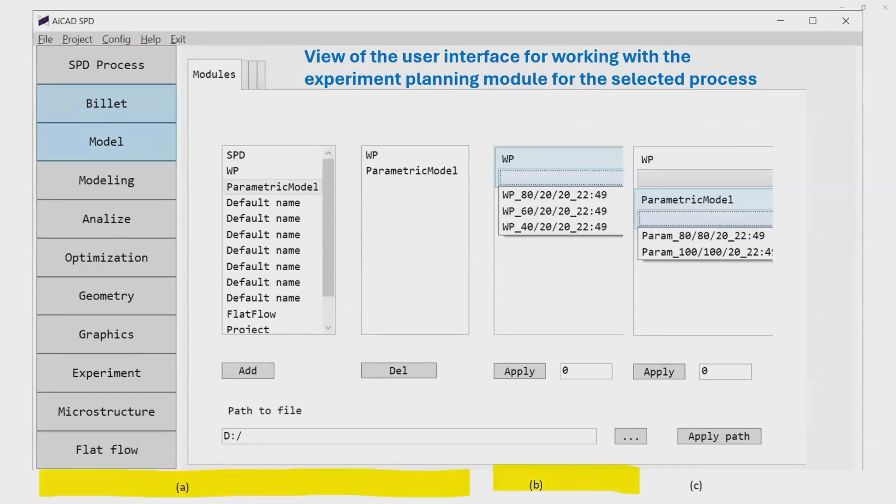An important issue in conducting research is the planning of experiments. To plan experiments on the modeling of SPD processes, it is necessary to create a list of objects that contain variants of tasks, for example, several billets with different sizes, a parametric model of equipment, etc. Then, to study a specific technological process, a sequence of work with various models is established. These models are selected from the general list, which is subject to change. A display of the pre-created list of workpieces and equipment is provided.

To simulate the selected technological process, the model is automatically built for the Abaqus CAE system. The modeling module launches each model from the experiment plan to perform calculations. The import of simulation results is implemented in the analysis module. A Python script is used to connect to the Abaqus post processor. The researcher could choose the values he needs for future analysis of the technological process.

As a result of the simulation cycle, one of the technological process options is selected. The interface of the geometry module displays the parametric model of the selected technological process and allows you to make changes to the dimensions. Clicking on the Transfer to CAD button leads to the transfer of a 3D geometric model to the SolidWorks CAD system. Interaction with SolidWorks CAD is implemented using the SolidWorks API.

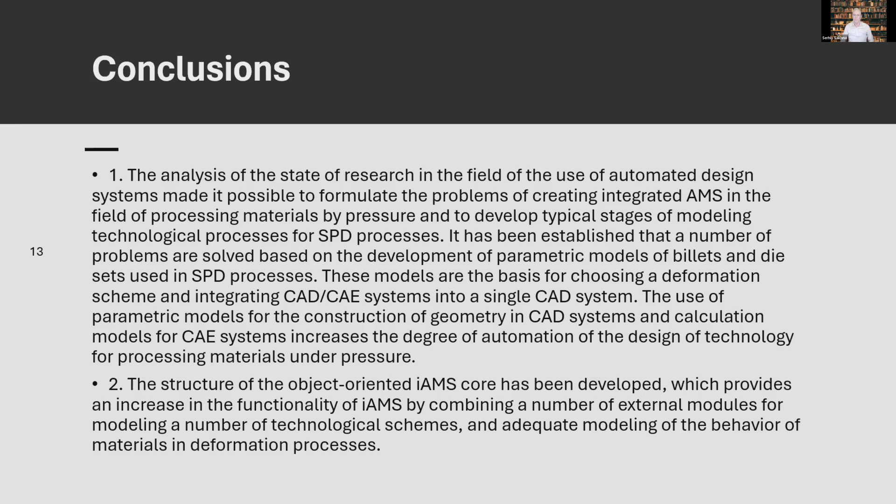So, our research is focused on the development of the structure of the core of the integrated automated modeling system. The AMS ensures an increase in the functionality of the CAD and CAE systems by combining them with several external independent models. The AMS models technological schemes of several plastic deformation processes, the behavior of materials in deformation processes, and reduces the cost of choosing the scheme and parameters of the deformation processes.

Object-oriented software was developed to analyze the influence of different initial shapes of the billets and the die sets on the changes in the billet's cross-section during deformation. This software is written in C# using the WPF interface and the page structure of the main application window.

Using parametric models of processes enables automated calculations in CAE systems and the generation of 3D geometric models of die sets in CAD systems. The design of experiments allows automation of research into several plastic deformation processes and reduces the cost of studies. Importing and accumulating calculation results in the CAE system made it possible to find the optimal values of the parameters of SPD technological processes.

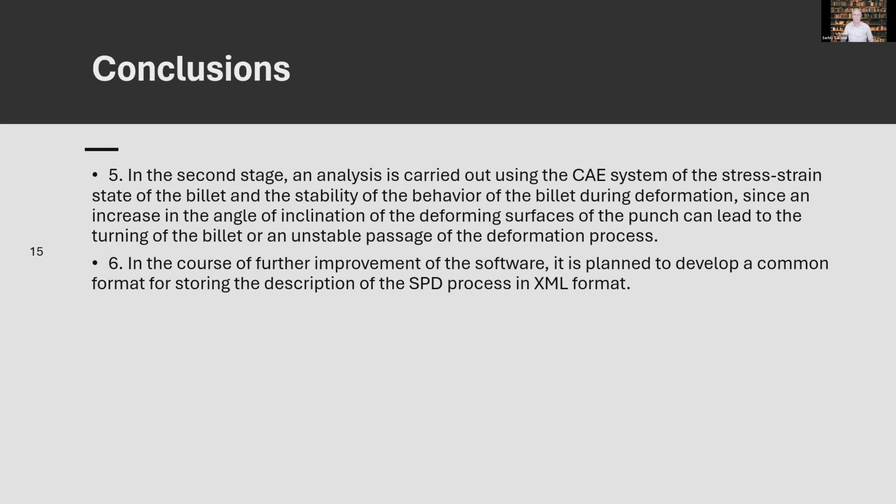The parameters of the deformation models obtained based on modeling are the basis for constructing the geometry of the die set in CAD, with subsequent integration with CAE to calculate the stress-strain state in the volume of the billet. Ways to expand software functions to support various SPD processes are proposed. Thank you for your attention.

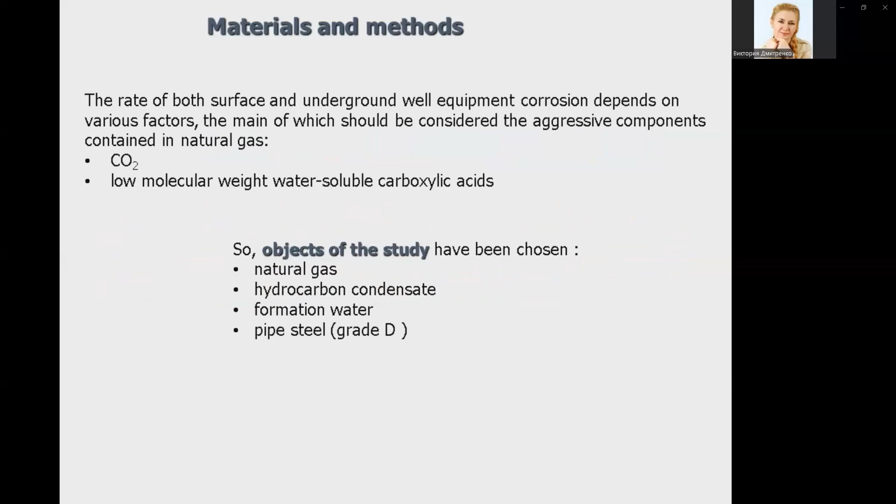So natural gas, hydrocarbon condensate, formation water, and pipe steel have been chosen as the object of the study. In the low molecular weight water-soluble carboxylic acids mixture, the main component is acetic acid, which therefore has been taken further for laboratory study.

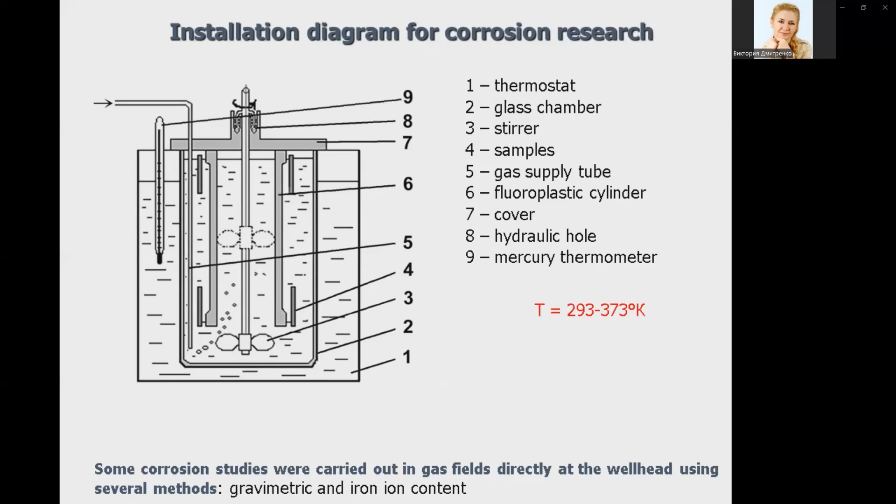Corrosion studies were carried out by gravimetric methods in a thermostatic installation. The speed of stream flow in the area of placement of the metal piece was 7-8 meters per second in turbulent mode. Some corrosion studies were carried out in a gas field directly in the wellhead using several methods: gravimetric and iron ion content.

It has been established that the corrosion rate of pipe steel over solution of acetic acid in carbon dioxide is the highest, in a carbon dioxide atmosphere over distilled water the smallest. No corrosion of steel in nitrogen atmosphere over distilled water was detected during the experiment.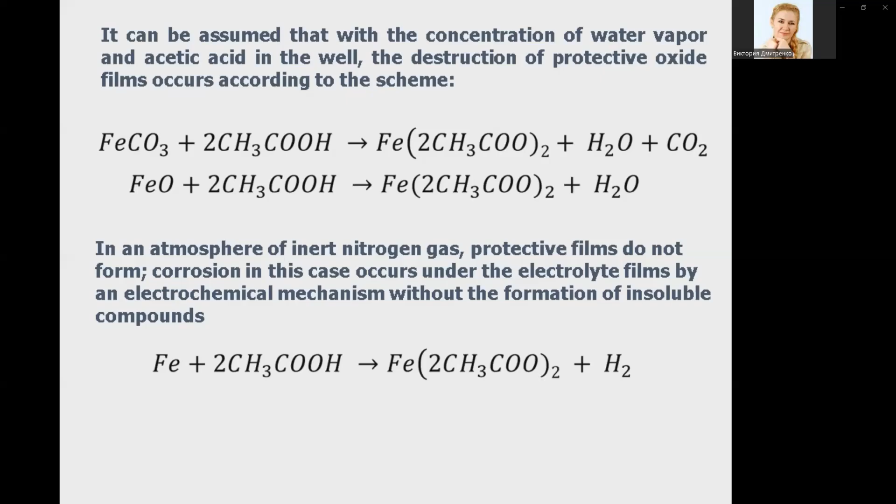The intensity of corrosion of the well bore was determined by gravimetric methods on a witness sample installed in the tubing, and visually on the tubing raised during repair. At these deposits, there is a correlation between the concentration of ions and the concentration of organic acids in the condensation water.

It has been established that the interaction of organic acids with metal occurs in the Dnipro-Donetsk basin fields in the temperature range of 90-110 Celsius degrees and at a depth of 3,000-3,500 meters. The interval of action of organic acids on metal tubing depends on the constancy of the regime and operation time of the well.

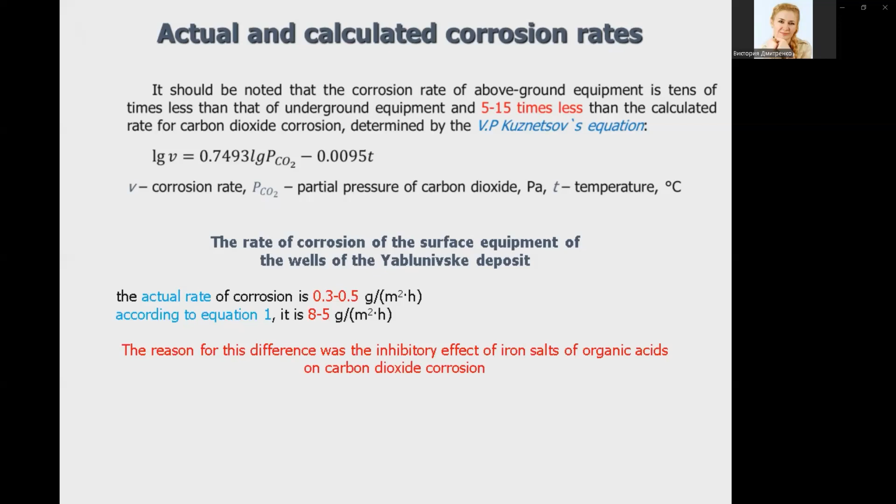The reason for this difference was the inhibitory effects of iron salts of organic acids on carbon dioxide corrosion. This assumption has been confirmed by laboratory studies. It has been established that the corrosion rate in the media taken from the well is 15-60 times less than in the model medium under similar conditions.

After treatment of the selected reservoir water with oxygen to decompose iron salts and remove iron oxides, the aggressiveness of the water condensate increases 10-15 times. For example, the corrosion rate of steel tested under the same conditions in water taken from the wellhead of well number 61 of the Yablunivske deposit, after removal of ions, increased to 14 grams per square meter per hour.

The iron salts of carboxylic acids, as corrosion products formed during condensation of aqueous fluids in a well, subsequently act as inhibitors of carbon dioxide corrosion of gas industry equipment.

So, in conclusion, firstly: the corrosive effects of organic acids entering the well along with water vapor is to stimulate carbon dioxide corrosion due to the destruction of oxide protective films.

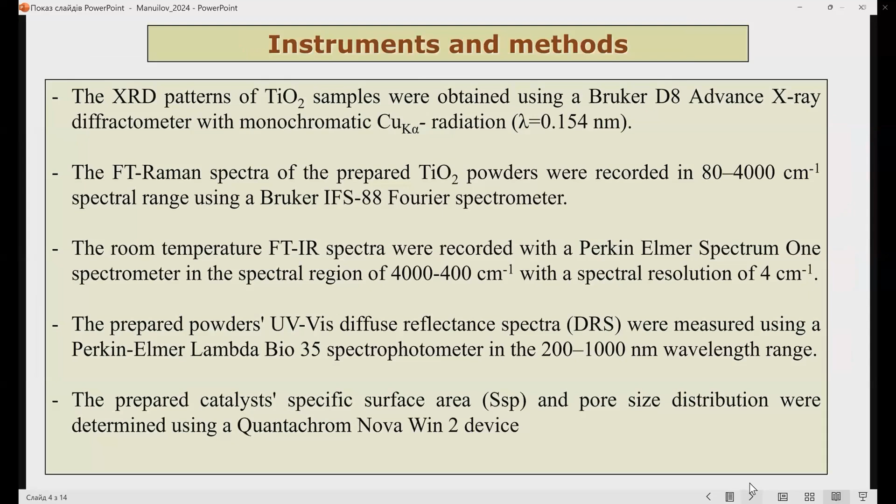These samples were investigated by different methods, shown on this slide. Photocatalytic hydrogen evolution was studied in a cylindrical glass temperature-controlled reactor. In the experiment, the prepared photocatalyst was dispersed in an aqueous solution containing ethanol as electron donor, and co-catalyst was added into this mixture. The reaction mixture was degassed before light irradiation using a vacuum pump. The suspension was irradiated using a high pressure mercury lamp under constant stirring with a magnetic stirrer. The gas phase composition above the solution was evaluated chromatographically every 30 minutes.

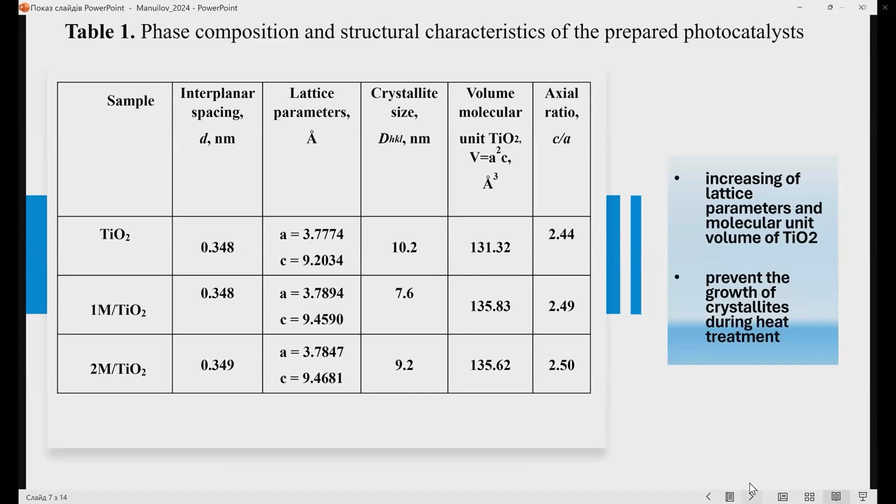The diffraction peaks at 2 theta equals 25.6, 37.8, and so on, correspond to anatase, and one small peak at 2 theta equals 27.4 corresponds to the rutile crystal structure. The rutile content didn't exceed 12%. The overall X-ray diffraction intensity from M-titanium dioxide powders decreased compared with that from undoped titanium dioxide. That decrease may occur also due to the titanium dioxide lattice deformation or reduction of crystallite size after modification. Indeed, we can see an increase of lattice parameters and molecular unit volume of titanium dioxide, and such modification prevents the growth of crystallites during heat treatment.

We also investigated these samples with Raman spectroscopy. We use the spectroscopy to determine the stoichiometry and the size of nanocrystallites in the prepared titanium dioxide. Besides, we use UV absorption spectroscopy to measure the band gap of these samples. It was established that the band gap for titanium dioxide is 3.27, for 1M titanium dioxide 3.14, and for 2M titanium dioxide 3.32.

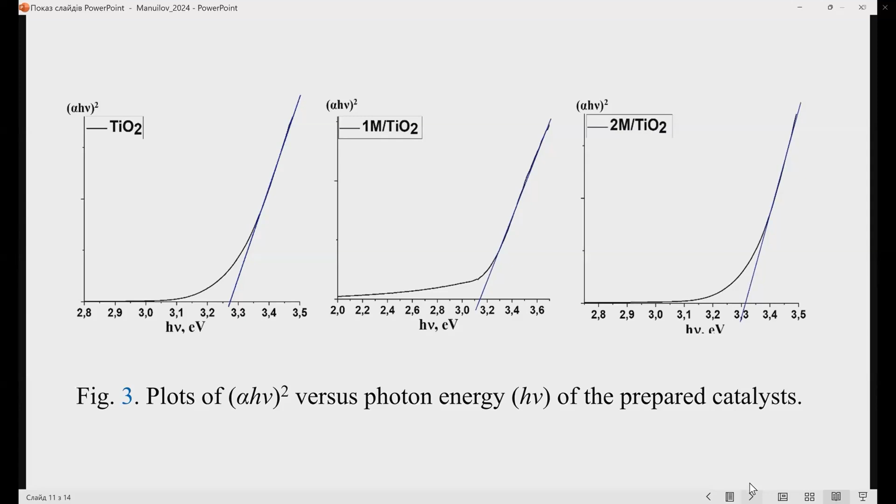And of course, we investigated the water splitting reaction in the presence of these samples under light illumination. The photocatalytic decomposition of water into hydrogen and oxygen requires the presence of a photocatalyst, an electronic oxide semiconductor with a band gap less than the energy of the incident light.

As we found, the melamine doped titanium catalyst showed more than 2 times higher activity than undoped titanium dioxide. First, it was due to the decrease in particle size. The rate of volumetric recombination of photo-induced charge carriers also decreased significantly, as they reach the surface much faster than the average time of volume recombination. The second reason is the narrowing of the band gap.

We have some conclusions. A set of photocatalysts based on titanium dioxide doped with melamine was successfully synthesized to obtain a highly effective photocatalyst for hydrogen generation. It has been found that titanium dioxide modification with melamine decreases crystallite size and changes the lattice parameters of titanium dioxide.

The purpose of our work is to create a bioactive, smart, thermoresponsive hydrogel which, when exposed to the body at physiological temperature of 37 degrees, irreversibly turns into sol, which can be used to introduce drugs into hard-to-reach places for local and long-term delivery of drugs, as well as for reducing the doses of delivered drugs.

The study objects of our scientific work were food gelatin, sodium alginate, and humic acid, which were received by extraction from lignite.

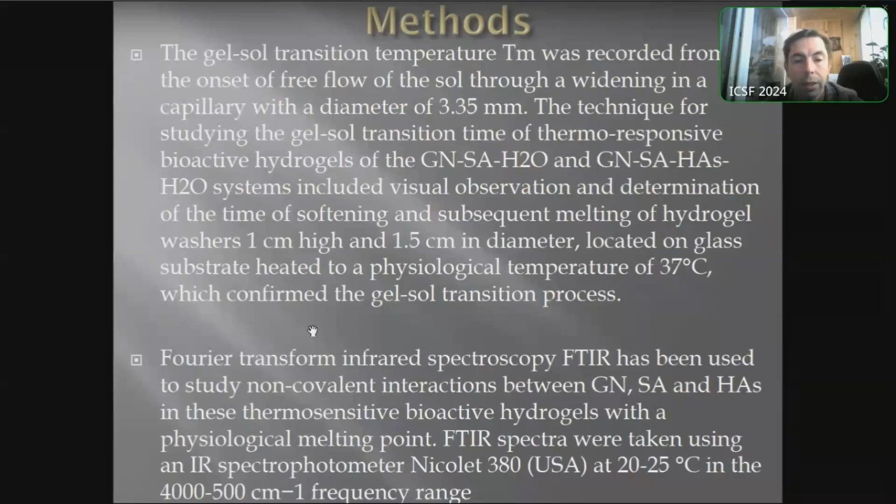We use such methods: the gel-sol transition temperature was recorded from the onset of free flow of the sol through a widening in a capillary with diameter of 3.35 millimeters. The technique used for studying this transition was rheological study. We used Fourier transform infrared spectroscopy to study non-covalent interactions between gelatin, sodium alginate, and humic acid.

So let us introduce our experimental research. First, rheological studies confirm that the hydrogel containing 13% weight gelatin and 6.4% weight sodium alginate is thermoresponsive and has a gel-sol transition area manifested in a sharp decrease in its kinetic viscosity at physiological temperature of 37 degrees.

Next, infrared research of the developed thermoresponsive bioactive gelatin alginate hydrogel shows small red and blue shifts in stretching and bending vibration positions occurring due to gelatin, sodium alginate, and humic acid interaction, similar to those observed in the literature, particularly due to conformational changes in the secondary structure of the polymer base, gelatin.

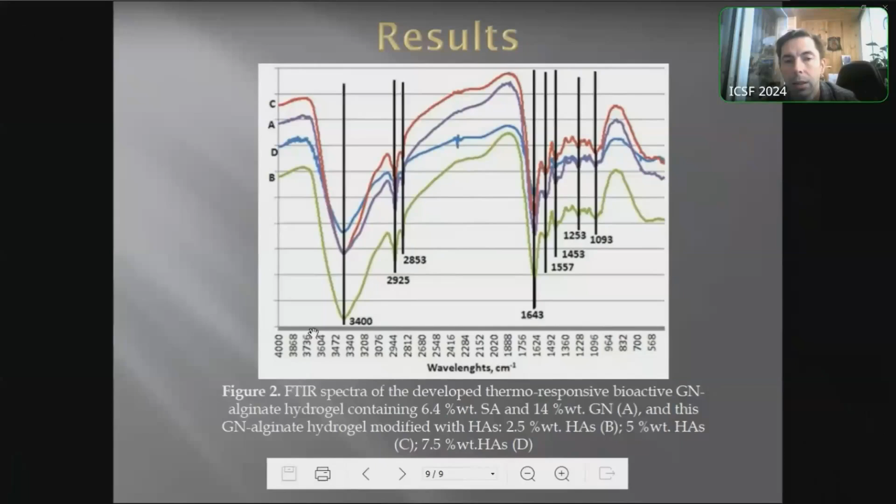In this work, we developed a hydrogel system that synergistically combines the outstanding properties of natural molecular polymers gelatin and sodium alginate, including non-immunogenicity. In addition, using our technology, we obtained humic acid with antioxidant and antibacterial activity from lignite and added it to the gelatin sodium alginate composition.

This is our general conclusion for this work. We developed a hydrogel system that can synergistically combine the outstanding properties of natural molecular polymers, gelatin and sodium alginate, such as low cost, non-toxicity, biocompatibility, and biodegradability. In addition, using our own technology, humic acid with antioxidant and antibacterial activity, obtained from lignite, was added to the gelatin alginate hydrogel, providing concrete advantages for the technological use of these substances.

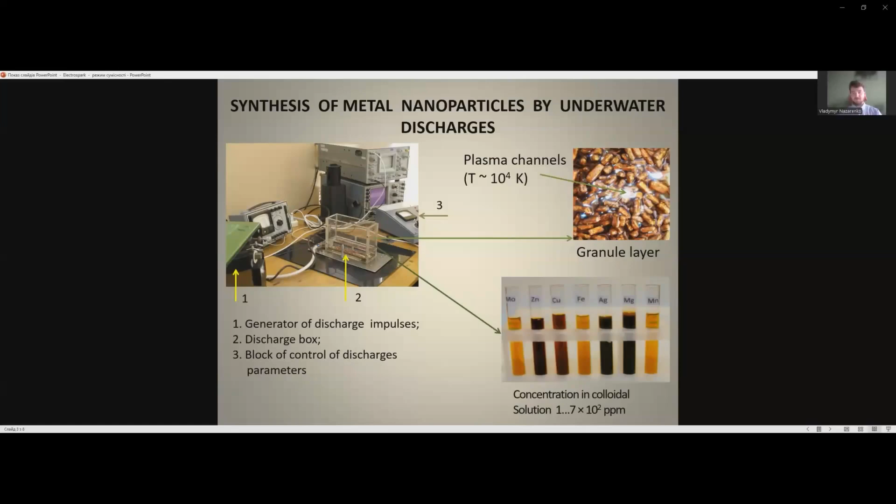There is a generator of discharge impulses, a discharge box, and a block for controlling discharge parameters. We used a granule layer of metals under the influence of plasma channels heated to a temperature of 10 to the 4th Kelvin. As a result, we obtained concentrations in colloidal solution for 7 different types of metal, ranging from zinc to ferrum to argentum to magnesium, and others.

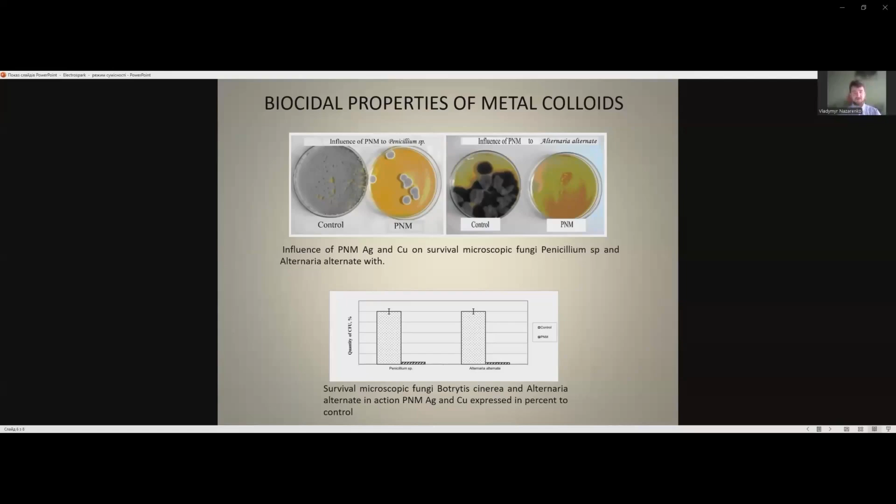On this diagram, you can see 2 types of fungi with different treatment using control and PNM solutions and the resulting substance. On the bottom, there is a graph that illustrates the survival of microscopic fungi, 2 types of fungi in action for PNM, argentum and cuprum, expressed in percentage to control. You can see control and PNM, this type.

As a result of our research, we found out that the inhibition of the germinated conidia of micromycetes was up to 97% in relation to control. The test results indicate that the particle nature of matter (PNM) solution prepared based on argentum and cuprum at a concentration of 9 microgram per liter are effective fungicide agents for Penicillium sp and Alternaria alternata.

Another important conclusion is that the use of PNM can help us solve the problem of using highly toxic chemicals, fungicides, and biocides. And it enables such solutions to inhibit the growth of pathogenic microorganisms by almost 100%. So these solutions are non-toxic to a biological system and have prolonged effect, which means that they can be used in practice and have a good prolonged effect on the environment and help us solve existing issues.